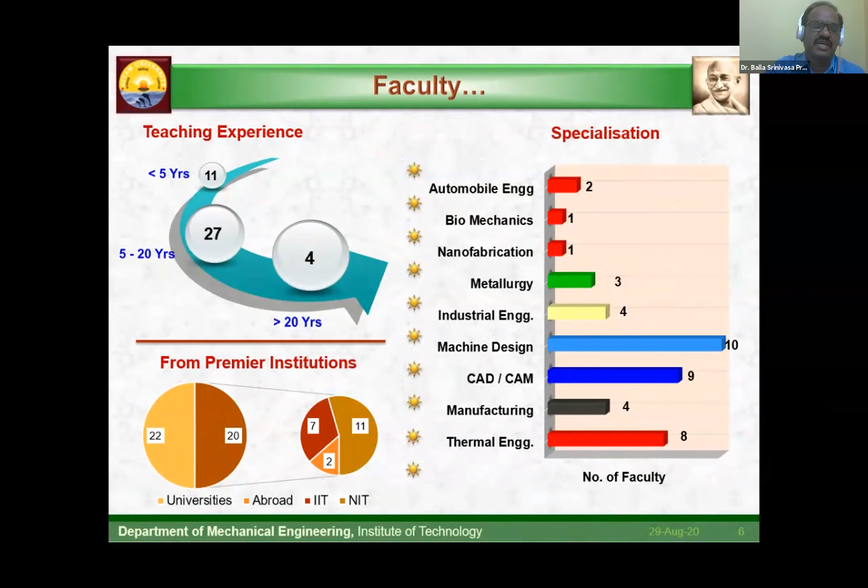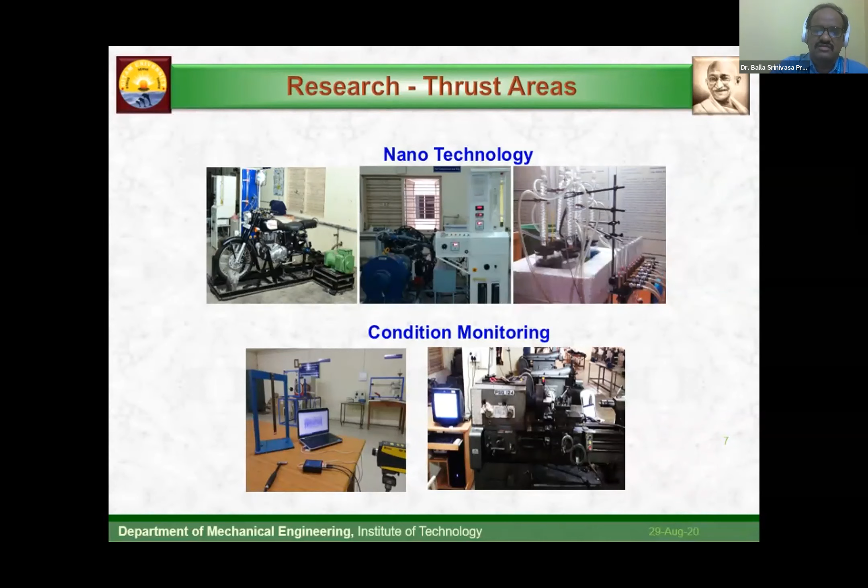Some faculty members are also involved in publishing books and book chapters.

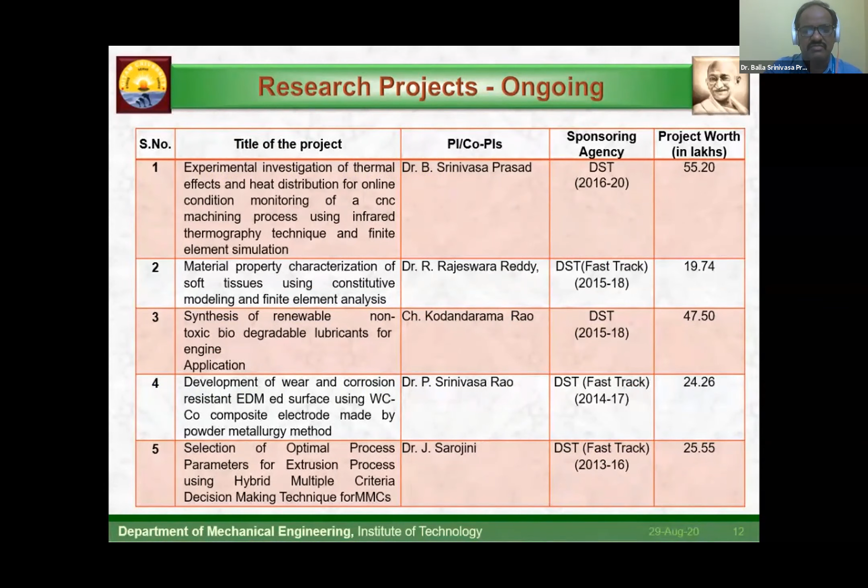This is the total worth of projects sanctioned to the faculty of Mechanical Engineering from various organizations of India. These are projects sanctioned by the Government of India to various faculty of the department, and I have included completed projects as well.

Students admitted to various programs in the Department of Mechanical Engineering have enough scope to explore research interests. These machines and equipment are not part of the curriculum, but are part of research projects. Whoever is admitted into this stream, whether PhD, MTech, or BTech, is allowed to work on this equipment, and the principal investigators actively involve students in these projects.

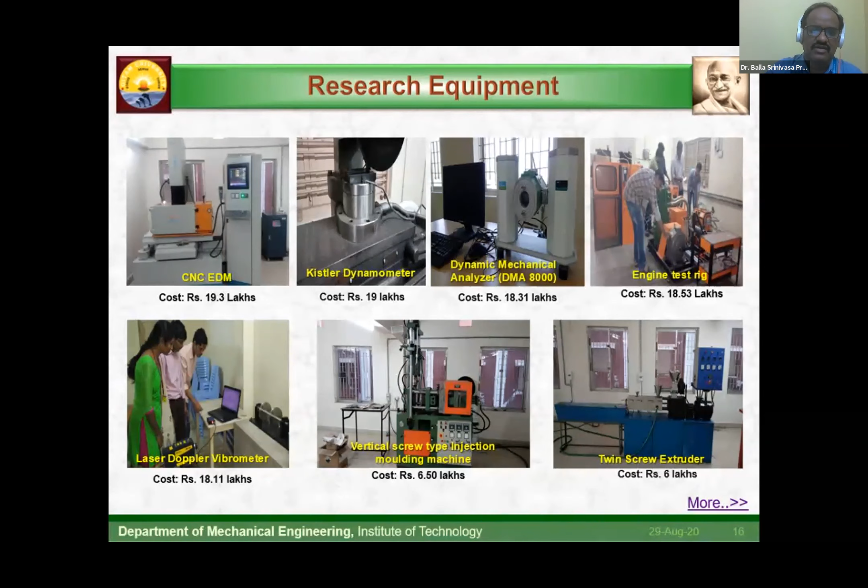This is one of the equipment procured by GITAM University with representation from our mechanical department, an Instron fatigue testing machine, costing nearly almost 1 crore.

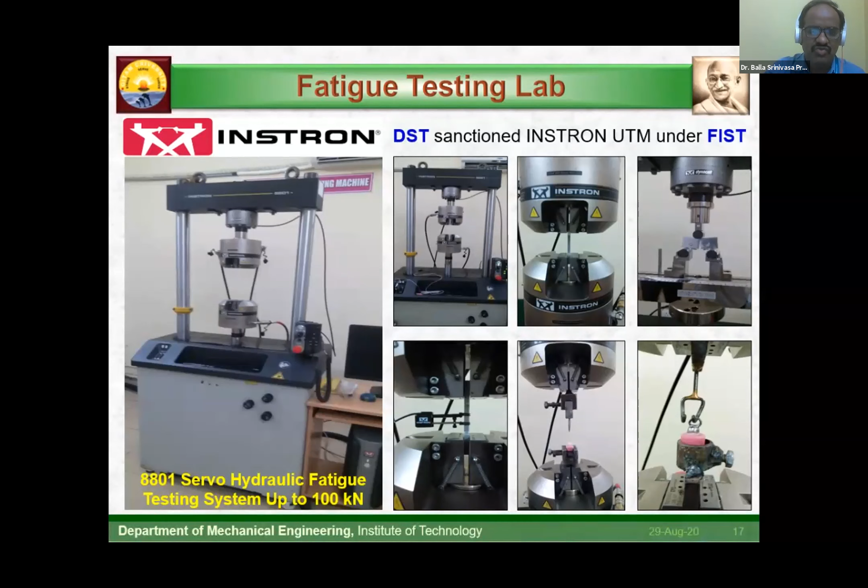This is about our department's involvement in consultancy, and this is about patents that some of our faculty members have already submitted. They are in an active stage of being awarded.

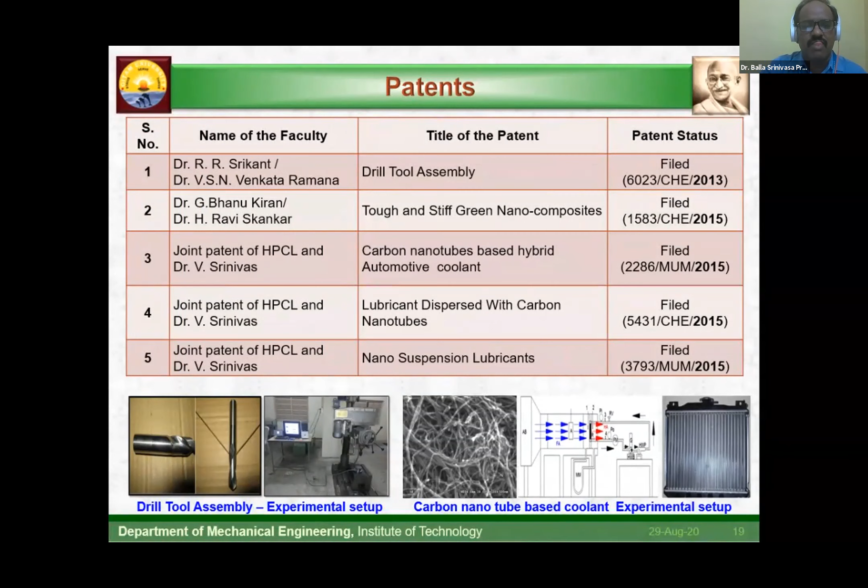These are the brief outlines about my department's credentials.

We actively conduct workshops and training programs, inviting experts from other countries, like you, sir. This academic year we started with a faculty member from University of Malaysia. Very happy to have you, you make us very happy, sir. Thank you. This is about the endowment lectures.

Our department has already organized endowment lectures at various stages, featuring popular personalities like Professor Samir Iqbal from University of Texas, a professor from New Zealand and USA, and Professor S.S. Rao, a well-known figure in industrial engineering from University of Miami.

This is about the collaborations our university has, including Hindustan Petroleum Corporation Limited Bangalore, Visakhapatnam Steel Plant (Rashtriya Ispat Nigam Limited), and CITD, one of the popular institutes in India. We have many such collaborations.

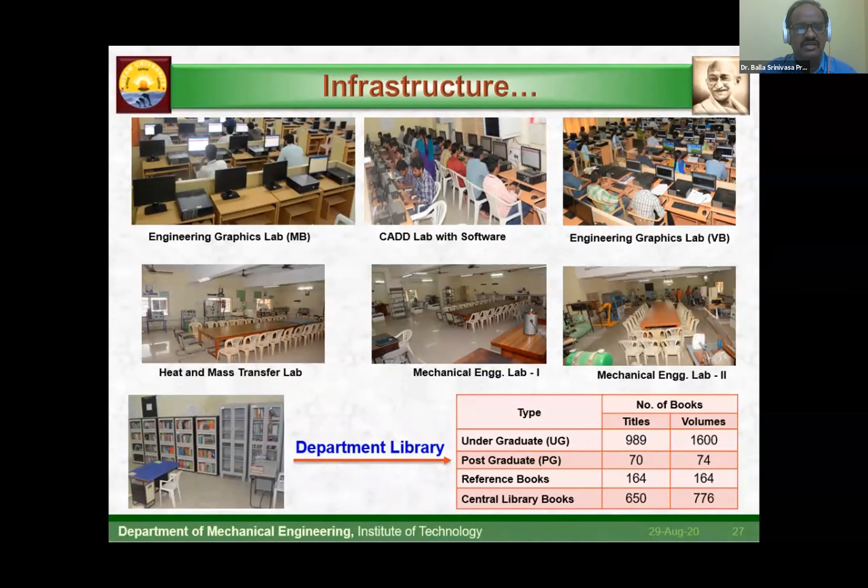This is the infrastructure facilities available in the department, and this is about students' progression. Academic monitoring, ICT-enabled learning, and we focus a lot on slow learners, with everything organized accordingly.

This is about the co-curricular activities of the Department of Mechanical Engineering, under the HOD Professor M.R.S. Satyanarayana.

This is extracurricular activities. Everyone is aware that India was affected by Hudhud, particularly in this region. We were affected by the Hudhud cyclone, and our faculty and students were involved in assisting the people.

These are the prominent alumni from the Department of Mechanical Engineering.

All these activities come under this. The Department of Mechanical Engineering has developed a forum that promotes research activities. So far we used to concentrate inside the institute and inside India, but with your presence it became global, sir, so we named it the Global Virtual Seminar Series.

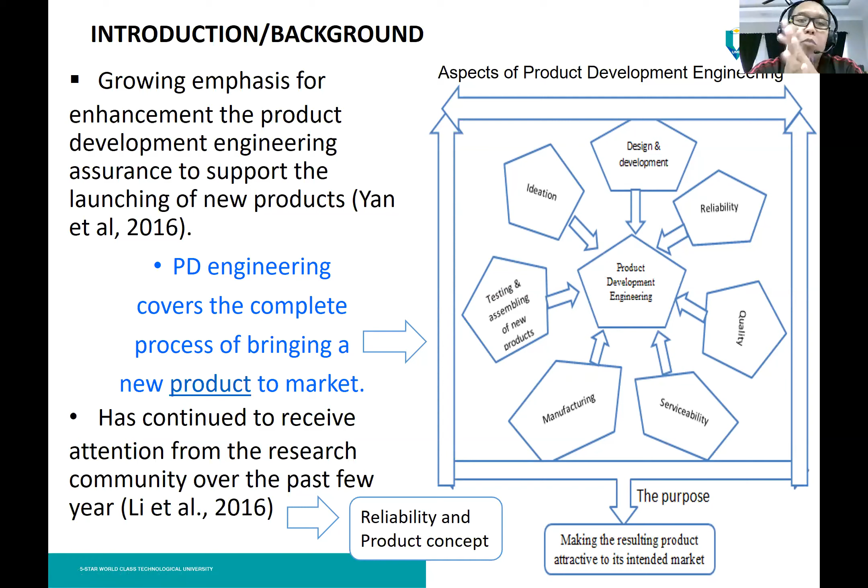As I said just now, most researchers previously separate between reliability and design concept. So as I mentioned here, I divided it into two parts. The first part is reliability, and the second one is concept assessment. If you look at most researchers, they try to separate these two things because when you combine them, your process will be too complex.

It will take too much time to integrate both techniques, and they require certain approaches or certain techniques that can actually integrate these two areas.

So some researchers focus more on understanding the reliability concern in complex products. For example, in 2015, one researcher focused more on the failure causes in the reliability area. Zubair and Bajri also focused more on predictability in the reliability area. Same goes for Liu and Anderson in 2015, who focused more on better management opportunities. Also, in 2014, Berlin identified the reliability problem areas.

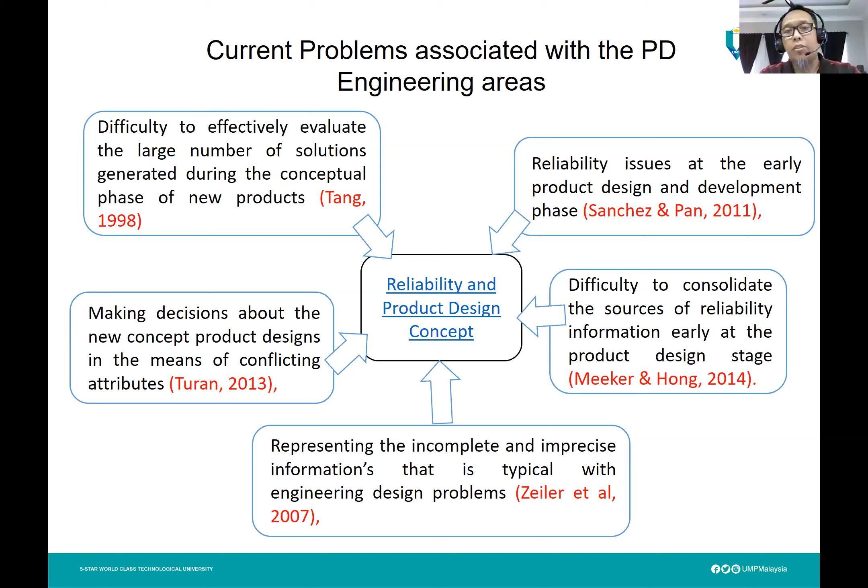With this constraint, it actually represents incomplete and imprecise information, which gives a tough situation to designers trying to make a final decision. Even though some effort has been made by researchers in improving decision making model techniques, there's still a need for a method to adequately and effectively address product reliability and design concept.

So in this research, I'll try to combine both the design concept and the product reliability. Instead of conducting them separately, in this research I'm trying to combine these two into one framework, so that it can help designers reduce product development time and cost.

If we look at this, there's one researcher, Xiao, in 2016, who highlighted accounting for the decision maker's subjective judgments. Of course, if we deal with human perception, it's very difficult for us to quantify, and he focused on this.

Li, in 2008, expressed the information in several dimensions to reflect the assessment information in a more holistic manner. As I said, feedback from respondents is sometimes very vague, so designers need certain techniques to quantify it.

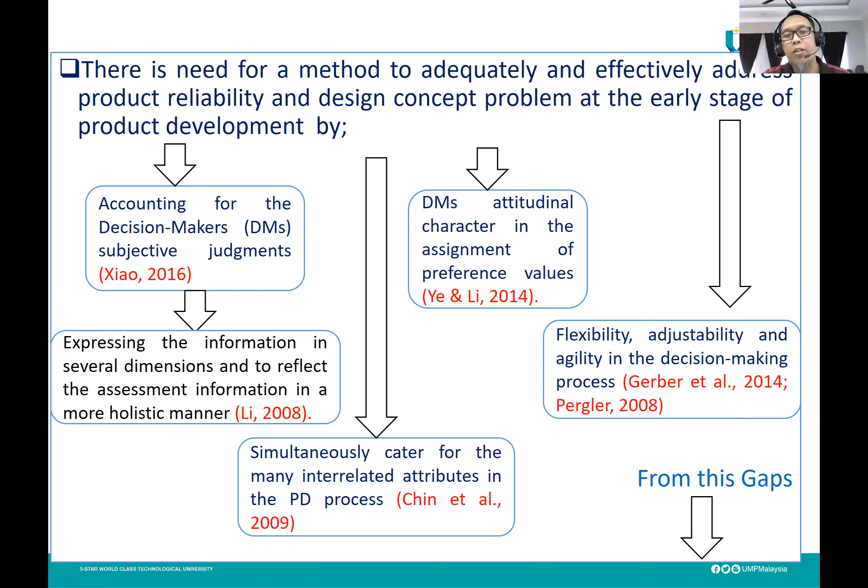From this gap, I'm trying first to define a reliability assessment method using elicited expert opinion for detecting the root cause of failure in existing products. I want to develop an assessment technique that can help designers get exact data to detect the root cause of failure in the existing process.

From objective one, I'll move to the objective where I want to develop a novel and flexible model. As I said, when developing a model, it should be flexible and adjustable enough so it can be used not only by designers in a certain area, but also in other areas, so this flexible and adjustable methodology can effectively support the designer in making high-level decisions.

I also want to apply the newly defined and developed reliability concept in product design assessment. As I said, the basic concept of my framework is to combine both reliability and the design concept.

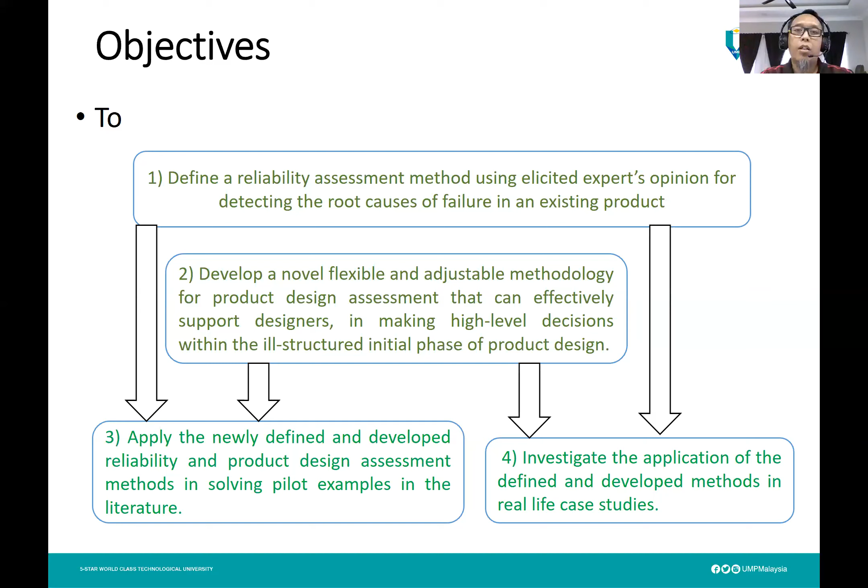So, the new reliability assessment model - basically for this one, I based it on the traditional fuzzy TOPSIS model.

The most common decision-making tactic is the TOPSIS model. Based on this TOPSIS model, I extended it by integrating it with the intuitionistic fuzzy environment.

Since it doesn't consider the attitudinal character of the designer, I introduce the attitudinal parameter. Of course, it's not a simple thing to combine the quantitative and qualitative data or qualitative method, so I need to integrate using the technique of exponential related function.

When we deal with human perception or human judgment, we need an aggregation technique. In this case, I use the intuitionistic fuzzy weighted averaging operator, IFWA. For step number 5, I also use the exponential related function based separation measures. Finally, for the final calculation, I use the intuitionistic fuzzy entropy to calculate the criteria weight. These are the details of the algorithm of the model.

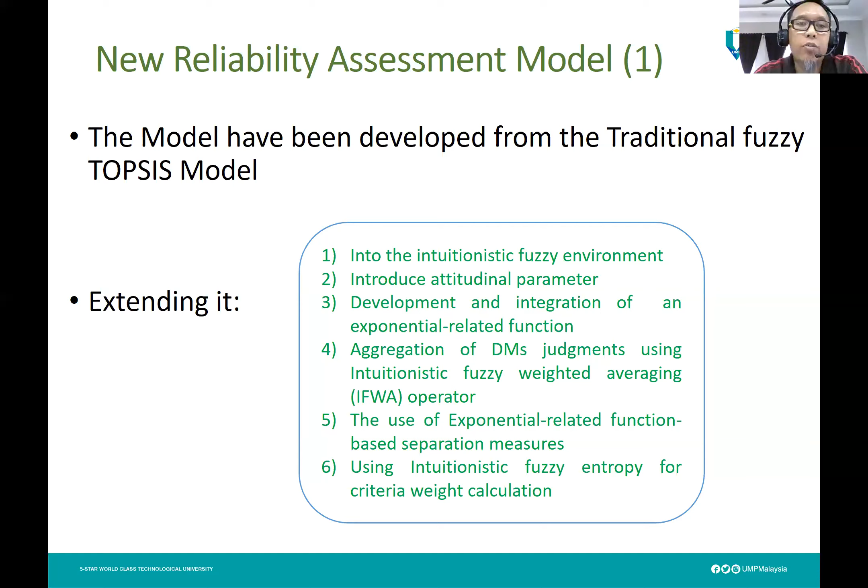Basically, I divide it into 6 steps. In step number 1, I try to aggregate the evaluation of the decision maker using the intuitionistic fuzzy weighted average, IFWA operator.

The first matrix that I show here is basically the generic metric. I just interpret the general variables, the general metrics, in the context of my research.

For step number 2, matrix number 2, in this case I used the exponential related function. This is where we include and try to quantify the human perception into numbers.

Step number 2 is actually the better performance rating from the previous metrics. The previous metric is general, and then I integrate it with the exponential function to become the customized metrics.

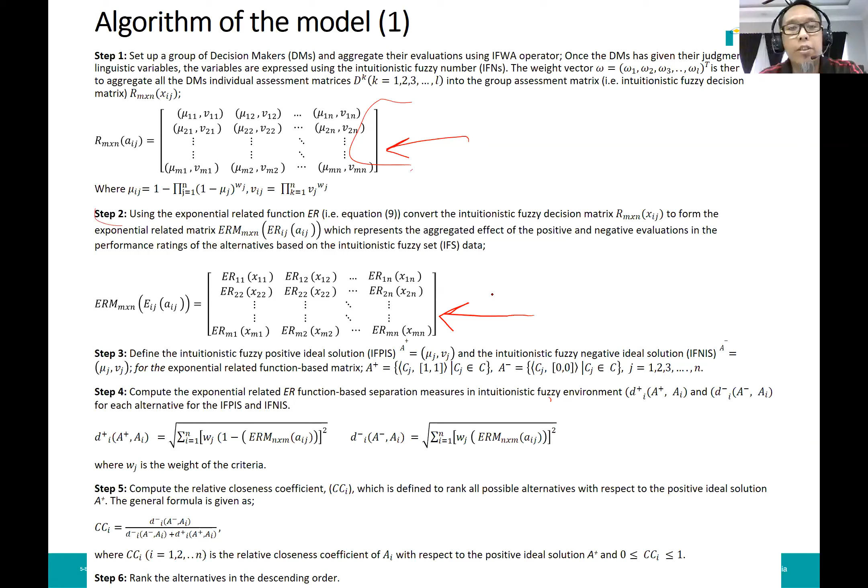We try to evaluate the algorithm by using data from a previous researcher. We based it on Yue in 2011, who attempted to implement the failure detection problem. We use the same data by Yue, who focused on severity, occurrence, and detection.

Using the conventional fuzzy TOPSIS, he finally got the ranking here for 3 attributes: A1, A2, and A3. His research shows that A2 is the highest priority, the second ranking is A1, and the third ranking is A3.

By using our proposed approach, we try to get the same number, and then we compare with Yue's results. It shows that A2 also gets the highest ranking. So at this stage, our proposed approach gives the same result as what had been done by Yue in 2011.

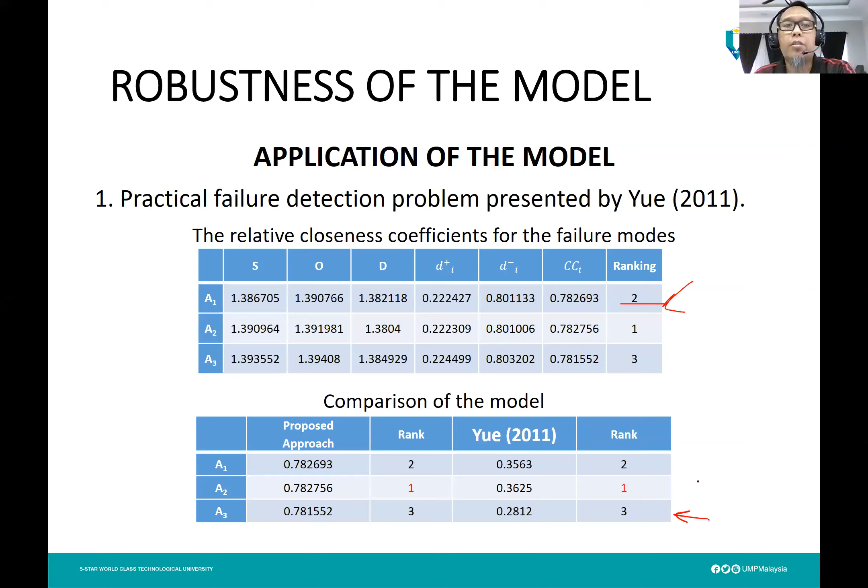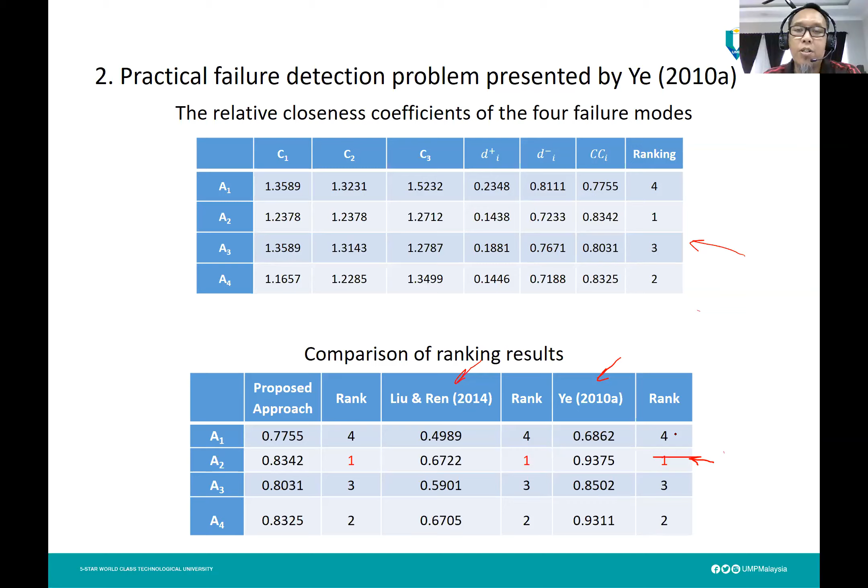Now, this is another challenge. Just now, the metrics that I showed you were not considering the attitudinal parameters or attitudinal character of the designers. Based on attitudinal theories, there are 3 main elements of attitude.

Number 1 is the risk-taking attitude, number 2 is risk-averse attitude, and number 3 is neutral. Here, I represent each character by lambda.

Risk-taking is lambda equal to 0.1. Risk-averse is negative 0.1, and neutral is lambda equal to 0.

We used the same case study as just now, which has 4 attributes. It looks like for risk-taking, it gives the same ranking as the previous result. But if we use risk-averse, it gives a different ranking, a different rank. For neutral, there's no need to do the computation, we just use the average number, because all criteria give the same values.

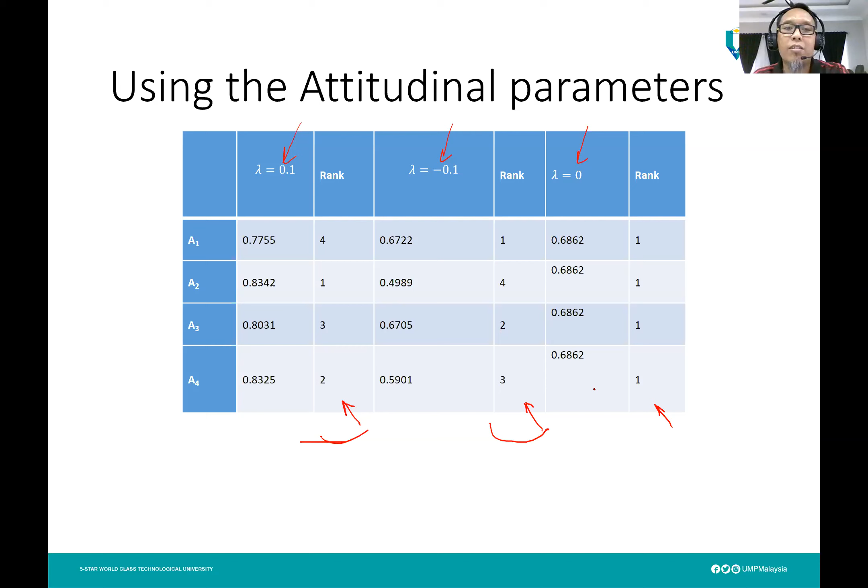So from this result, we know that the attitude of the designers will give a different result to the final decision. So this is our challenge. We don't know in the process of when the designer does a design, or makes a decision, we cannot actually detect or identify whether the attitude of the designer is risk-seeking or risk-averse. So to help improve the situation, that's why we came up with a new approach. Later I will explain.

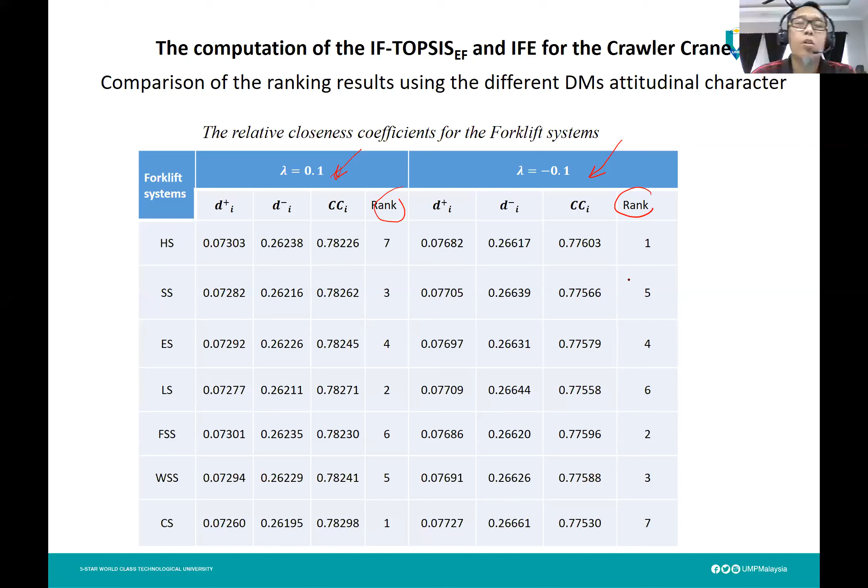But before that, I want to show you, if we consider this: we did a case study on the crawler crane design. We have 2 conditions, one is risk-seeking and the second one is risk-averse. We can see the rank here, using fuzzy TOPSIS, that both characters give a different value and different ranking. So it proves that different character will give different results or different decisions.

So that's why, instead of just basing on the first step, the first algorithm just now, we come up with the second step, which is the new assessment model. It is inspired from Tan in 2011 and Ye 2013, where we use the triangular intuitionistic fuzzy numbers to further improve the technique on how to deal with the designer's character or attitude.

So these are the steps of the new model. We use the intuitionistic fuzzy number, and second, we allow for more attitudinal information. We don't just base it on single data, we keep getting the attitudinal information from the designers. Then we introduce the flexibility and adjustability function, because different designers have different environments, different nature of work, so we have to include this flexibility and adjustability function. And since I'm trying to integrate two different models, at the end I have to reduce the computational step, otherwise the method will have a very complex process.

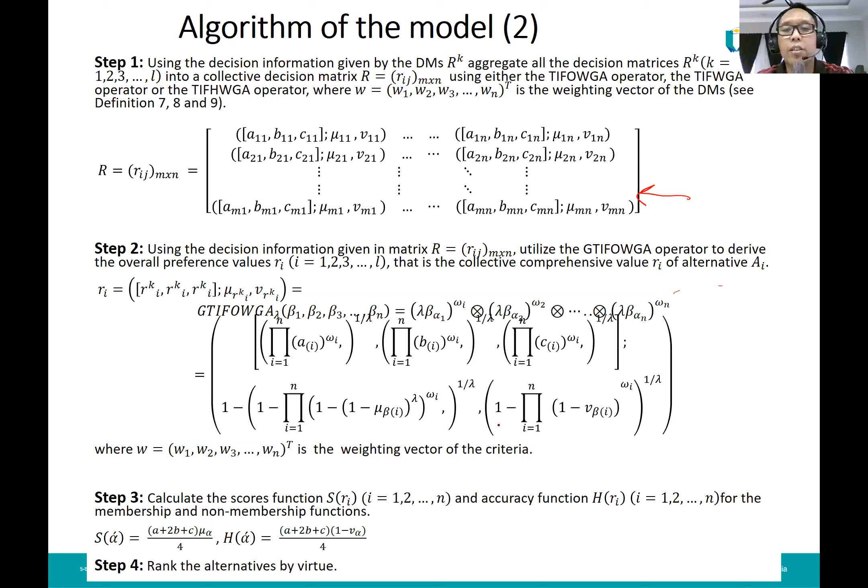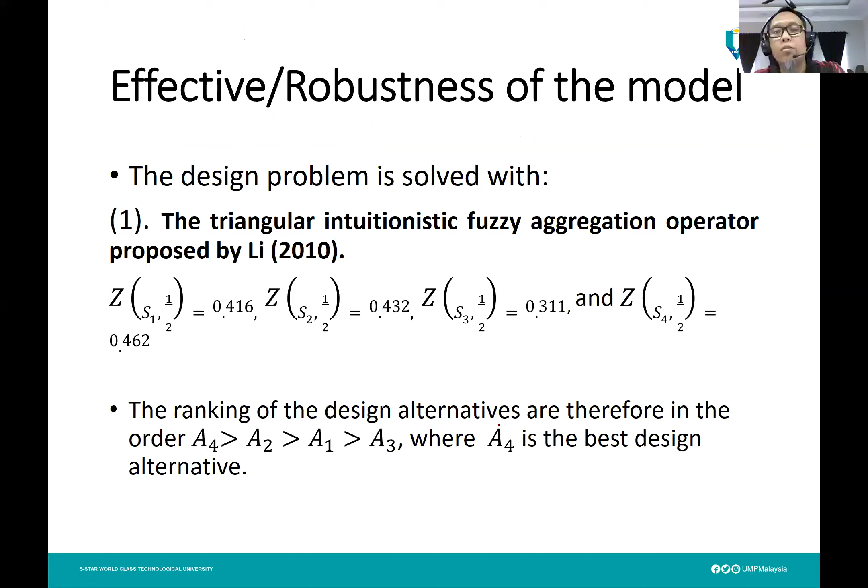So these are another design problem with 4 attributes, and of course I have different criteria for each design. Using the method that I showed you before to compute this data, and finally when we rank the alternatives using the technique I showed you just now, I'm using the triangular intuitionistic fuzzy aggregation operator and then VIKOR, instead of just relying on TOPSIS, I'm trying to extend it using the VIKOR method. The final ranking shows that A4 is the best alternative.

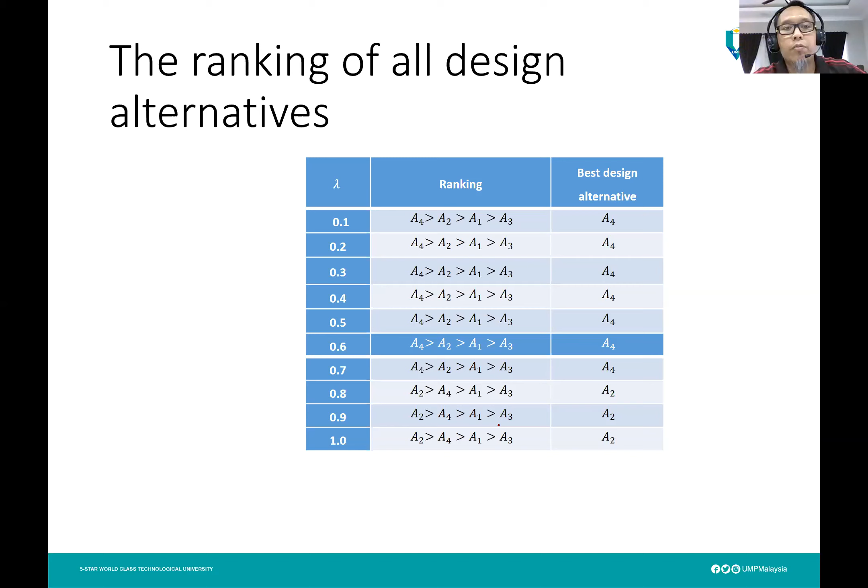And also, if you look at this, the lambda is actually the value of the attitude just now, the attitudinal parameter that we already quantified, using VIKOR or the matrix just now, we already embedded into the matrix. So from these two methods, the two models that I showed you, I already take into account the attitudinal character of the decision maker by using the exponential related function and the flexibility and adjustability parameter.

And for the reliability model that I showed just now, it enables the detection and prediction of the root cause of failure, which the study found useful at the early design stage. So by using the proposed method, the designer can actually assess both the reliability and the concept design stage by considering the attitudinal character of the designers.

This model actually simultaneously caters for the many interrelated attributes in the product development process. So even though I'm just focused on reliability and concept design, using the same technique, it can also consider or cater to other factors in the product development engineering.

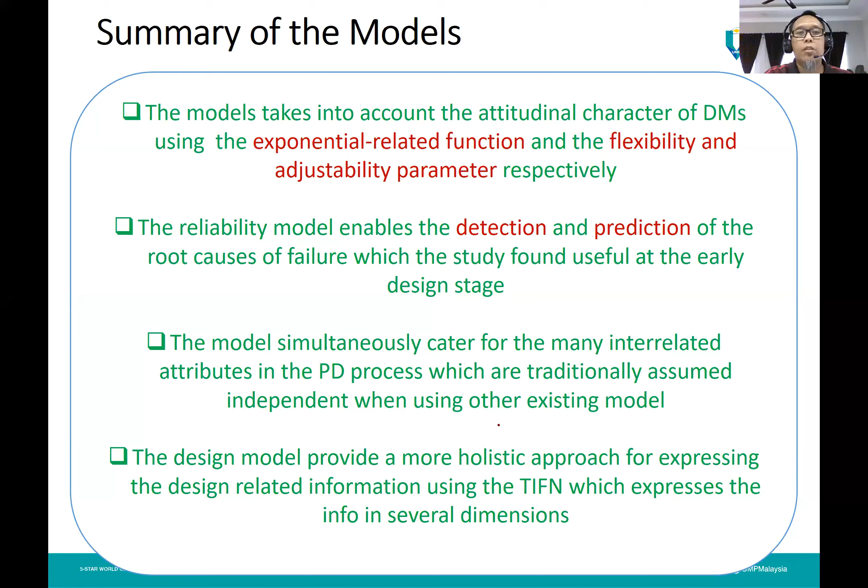The design model provides a more holistic approach for expressing the design-related information using the triangular intuitionistic fuzzy numbers, which express the information in several dimensions. And finally, I call these two-step techniques AI-based techniques.

This technique actually provides an innovative approach which could support the launching of new products, since the aim of this approach is basically to help the designer reduce the product development time and cost. So this study also provided two new AI-based techniques, as I said.

Number one is the reliability. The second one is the concept design by including the attitudinal parameter.

And then in the future, as I said, we intend to make the model user-friendly after some improvement. So my aim is to develop a decision support system, so we can make it into simple software, so that it can help the designer simplify the process. You just key in the value and then you get the final results.

So these are some references that I used for this research.

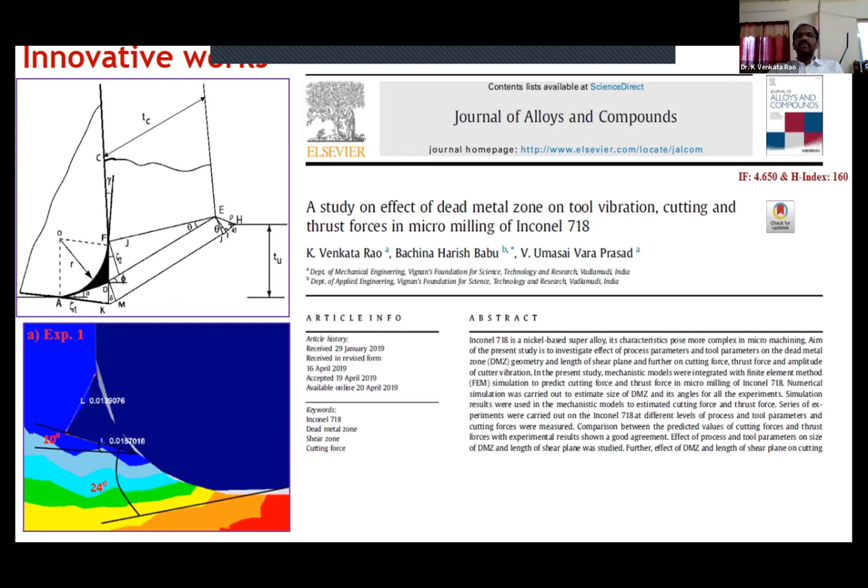So another innovative work—this is also a very limited study done on the effect of wire vibration on kerf width and surface roughness. For the surface roughness, we have mathematical models to find out the surface roughness using the vibration in X and Y direction.

But here, kerf width is difficult to model. So in this study, myself and my colleagues at Vignan University developed mathematical relations using the wire vibration in X and Y direction.

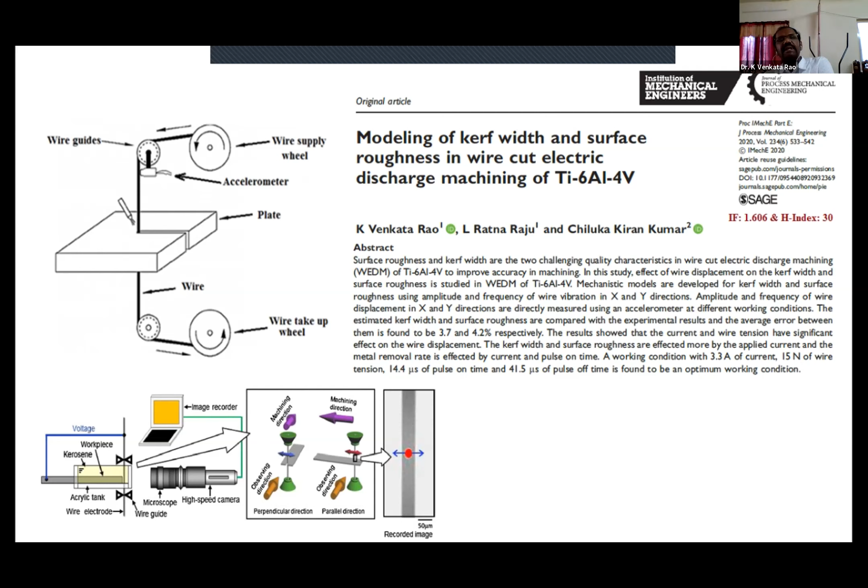Anybody can do this one. This is another innovative work considering helical milling, where we measure the vibration of the tool in X, Y, and Z direction using the amplitude and frequency of tool vibration in 3 directions. We developed mathematical models for the circularity ourselves. This one was accepted and published in an SCI journal.

Using gray modeling prediction techniques, GM11, GM12, and so on, we have mathematical gray models. It doesn't take more than 1 week. You can easily use the gray prediction model, GM11 or GM12, using time series, to predict the cylindricity also.

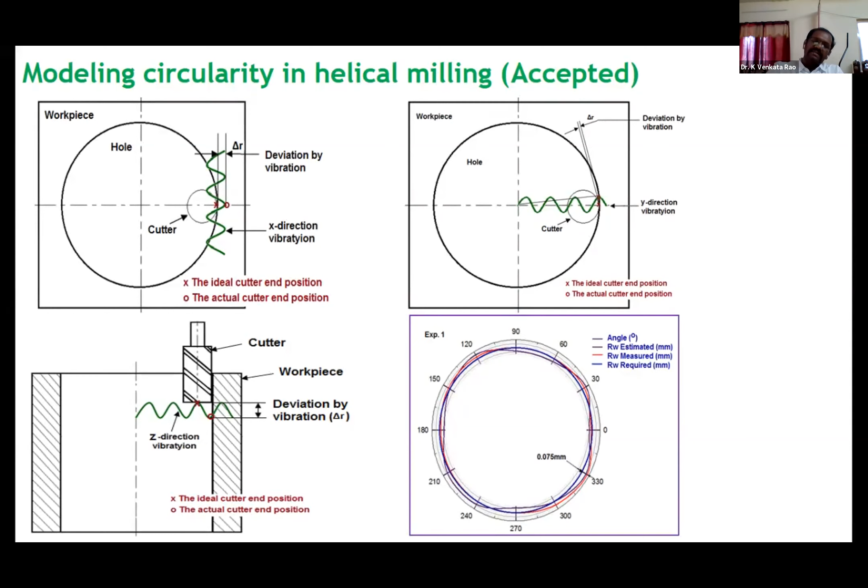Here we predicted only the circularity, but you can predict the cylindricity also. Along the length of the workpiece, you can find out the errors in cylindricity during the machining process. You can predict this. This is one of the predictive works, and here is another one.

We can scientifically find out the weights for the responses. We did this work for 3 papers published using GTMA, all in SCI journals, including the Journal of Alloys and Compounds, a high impact factor journal.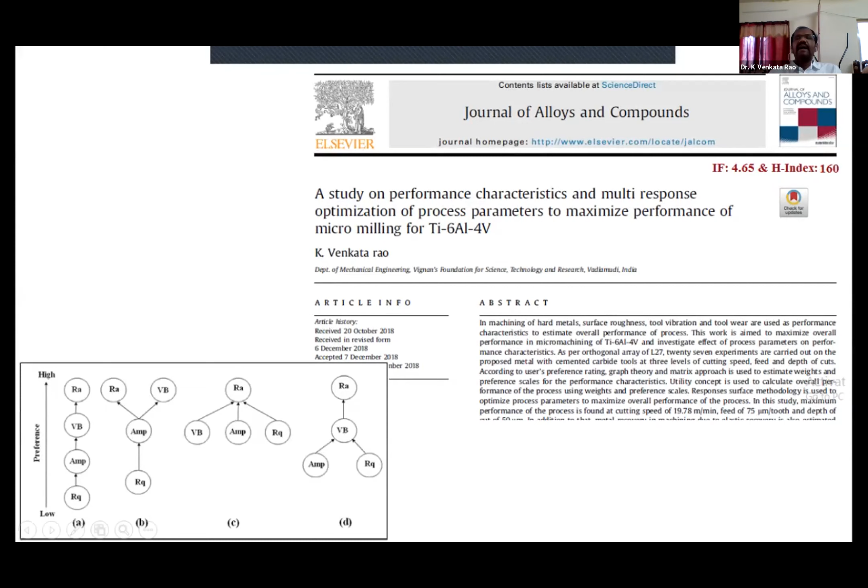This is another one where we use AdvantEdge software for ball end milling. Ball end milling is generally used in the fabrication of dies, where at corners you have sharp corners that need to be smooth. In a regular end mill cutter, if you see the bottom, it is flat, so you cannot get round corners in the die cavity. To get round corners, you must go for ball end milling.

Compared with flat end mill cutters, ball end mill cutters have a larger cutting zone, which is associated with more cutting forces and higher power consumption. So here we used the same TLBO technique to reduce power consumption. This was published in the journal Measurement.

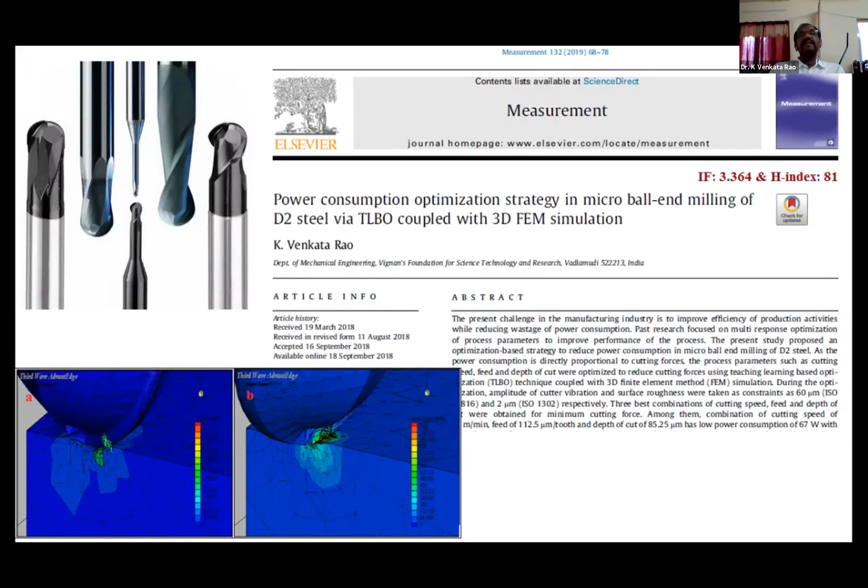Okay, this is another innovative work, friction stir welding done by me, where I used DEFORM 2D-3D integrated.

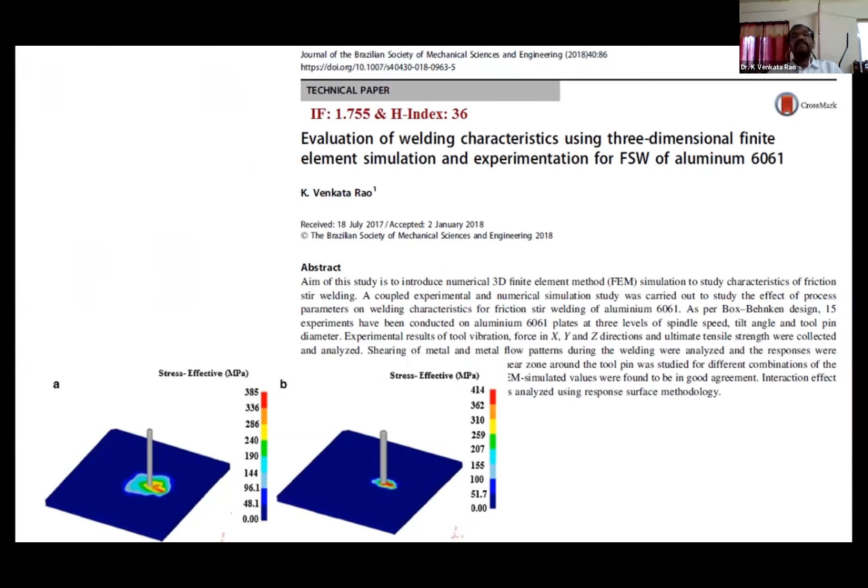So we have deform 2D 3D. We have a deform integrate 2D 3D option in the deform software. Using that, we can simulate the welding process. This was also published in the Brazilian Society.

Now this is the last one, recently done, published on August 25th. This work was done by me. We have another work of the same quality, yet to be published, currently in the review process. This one is also done by me.

Its impact factor is 7.246, the highest impact factor in Production. Now the work which I am presenting is the one I published in Cleaner Production.

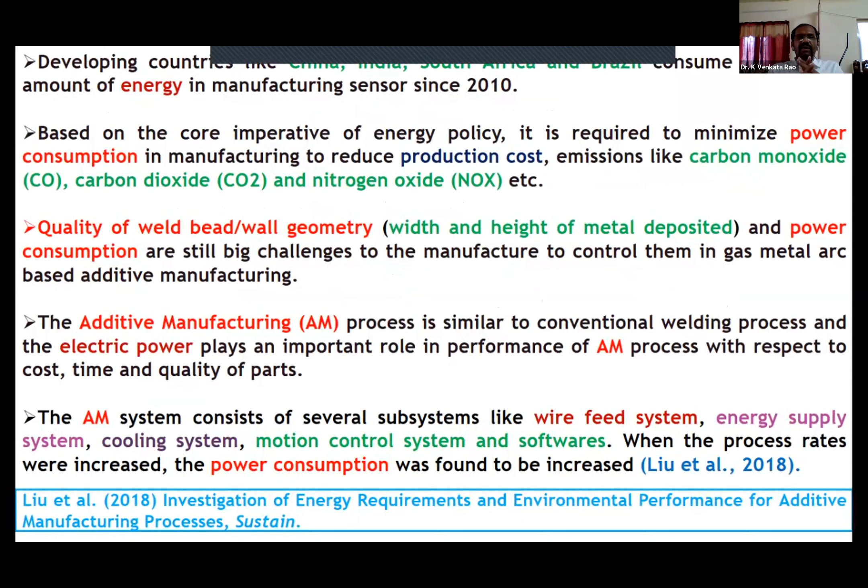Now you see, in developing countries like China... Now I'm entering the actual work presentation. Please listen carefully.

In developing countries like China, India, South Africa, Brazil, Sri Lanka, the power consumption has doubled since 2010, especially in the manufacturing sector. In most developing countries, the manufacturing sector occupies a 25% share of the country's GDP.

So when the manufacturing sector is large, the power consumption is also more. When power consumption is more, there is also environmental impact. When demand for power is more, to meet that demand we produce excess power, which proportionally impacts the environment. So here we want to reduce the amount of power consumption.

In metal manufacturing industries, there are many power-consuming subsystems. For example, if it's a machining industry, most machines are metal cutting machines. In addition, we have material handling systems and coolant systems. Like that, we have various subsystems.

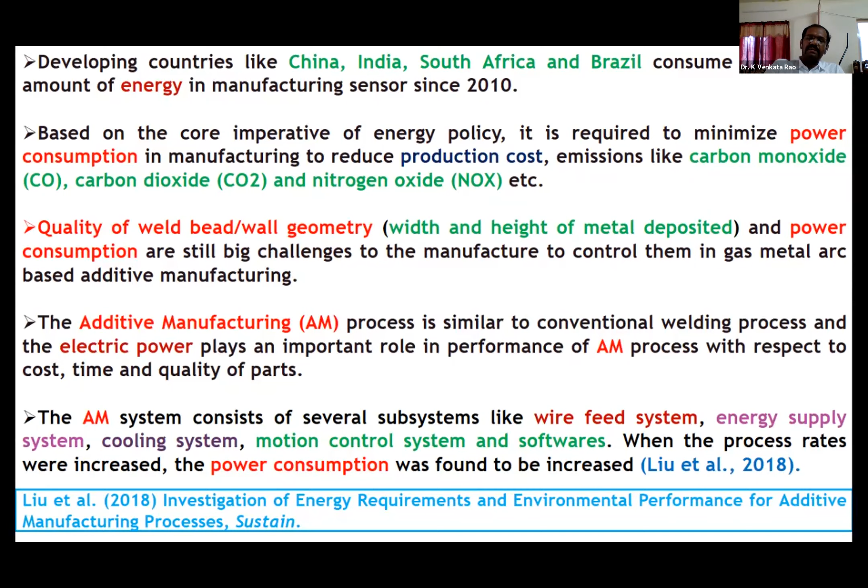Additive manufacturing is similar to conventional welding, where an arc is generated between the wire electrode and the workpiece, and the spark or arc consumes power to melt the wire electrode. Everybody knows arc welding, that's why it wasn't explained in detail here.

Here are some components showing the quality made by additive manufacturing. In the first figure, a circular component, and other complex shapes can also be made by additive manufacturing. Most of you know this. First we build the component through solid modeling, then it's made into slices, each slice thickness less than 1 mm.

In additive manufacturing, most of you know this - layer by layer, just like slices, the work is done in conventional additive manufacturing or 3D printing. But in this additive manufacturing, it's not exactly like that, though the concept is the same.

Here also layer by layer, but each layer is not less than 1 mm, more than 1 mm. So the thickness of each slice is more than 5 mm. That's how we have it in metal additive manufacturing.

Our aim here is to control the wall geometry quality, that is thickness and height, and what is the optimum thickness and height. As per requirement, the thickness of the wall should be 5 or 6 mm, not more than that. Like that, we have constraints, and according to these constraints, the component is to be made. The constraints in detail we will see in the next slide.

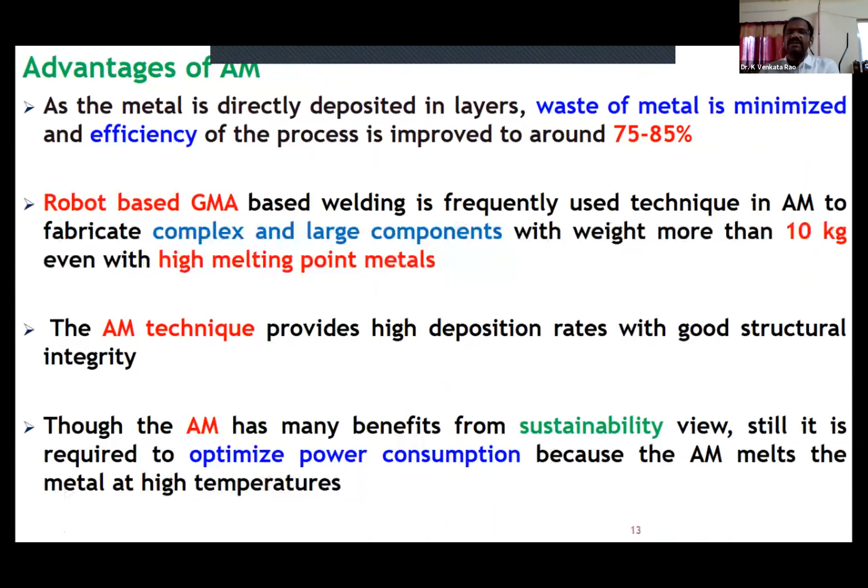Nowadays we are using robots in additive manufacturing. The robot arm is given the torch, and it is programmed to move in X, Y, and Z directions. It is able to fabricate complex and large components. This kind of part can be made by the robot - weight more than 10 kg, with high melting point metals like titanium and inconel, can also be fabricated using this robot-based gas metal arc welding technique in additive manufacturing.

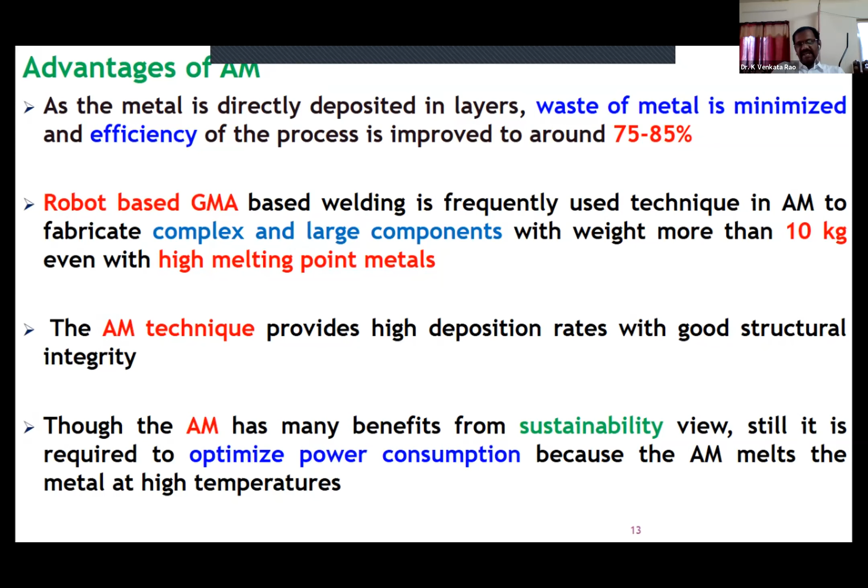Though additive manufacturing has many benefits, it is still required to optimize power consumption, because it melts the metal at high temperature. So it consumes more power than in cutting processes. That's why it's required to optimize the power consumption.

These are some previous research works where difficulties were found. In robot-based arc welding additive manufacturing, at the start you typically see swelling, and at the end you see reduction - this is a common problem for everybody. This can be sorted out by controlling the process parameters at the start and end.

He et al. proposed some control working conditions at the starting and ending through a certain technique. We were also able to achieve this - in the second figure obtained in our own work, there is no much variation at the starting and ending. Using the same technique, the swelling at start and reduction at the end can sometimes be completely controlled.

Another thing to look into is arc force. This work was done by Lee et al., published in Robotics and Computer Integrated Manufacturing, 2019. He studied the molten pool, that is weld pool stability, of thin wall parts in robot GMA (gas metal arc) based additive manufacturing, with various deposition positions, conducting experiments at 60 degrees, 90 degrees, and 120 degrees torch angle.

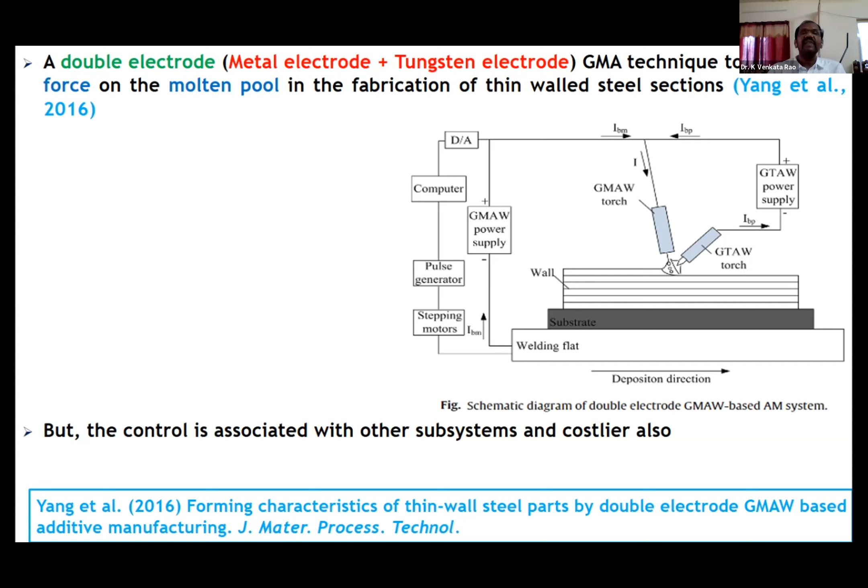This slide we already explained in advance. So in that presentation, we studied the effect of arc force on the thickness, width, and depth of the weld bead.

So what are the forces in that metal transfer? There are different theories for metal transfer. What is this metal transfer? Generally, in the second year in manufacturing technology, in gas metal arc welding, that is metal inert gas welding, we have five types of modes of metal transfer: short-circuited, globular, spray, pulsed, and rotary spray.

Among all these, by increasing the parameters, we can get a transition from globular to spray, to rotary spray. Like that, we get pulsating spray. We get different types of modes of metal transfer. So among the different types of theories we have, for this work,

I took the static force theory, which describes the detaching of molten metal, that is the drop, from the metal wire electrode. This work was done by Kim and Eager in 1993. We have the filler wire, that is the electrode, and electromagnetic force at the top, which tries to detach the molten metal from the wire, and gravitational force which pulls the drop. So when the drop is growing while melting, as the gravitational force increases with size, once it reaches a certain weight, automatically by gravitational force it will fall as a drop.

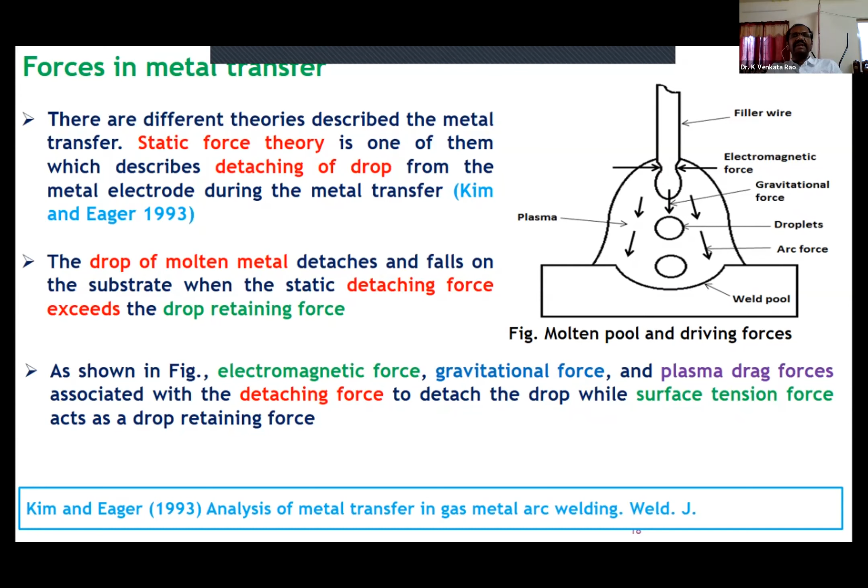These are the electromagnetic force, which depends on the current, and this one is the gravitational force. How to find out this gravitational force? The details are given here. This is also the plasma stream force. All these values are standard values taken based on previous researchers. Finally, the total arc force is the sum of electromagnetic force, gravitational force, and plasma force.

Sum of these three. So the effect of this total arc force on the wall geometry was studied in this present study. This is after performing the welding or additive manufacturing. See this, like this.

Across this specimen we cut, and this is placed under the microscope and measured the size. So this is the weld pool, width of weld pool. This one is the height of metal deposition. This one from here to here is the width. So that's the profile of this one.

Generally, the geometry of profile of metal deposition is on substrate, the plate where we welded. Different studies have defined this using parabola, arc, and cosine curves to study the effect of process parameters on the bead profile. As shown in the figure, bead profile seems to be symmetrical and is modeled with a parabolic function given in this equation, where x, y are the coordinates of any point on the parabola, H is the height, A is constant. Everybody in manufacturing technology knows this equation.

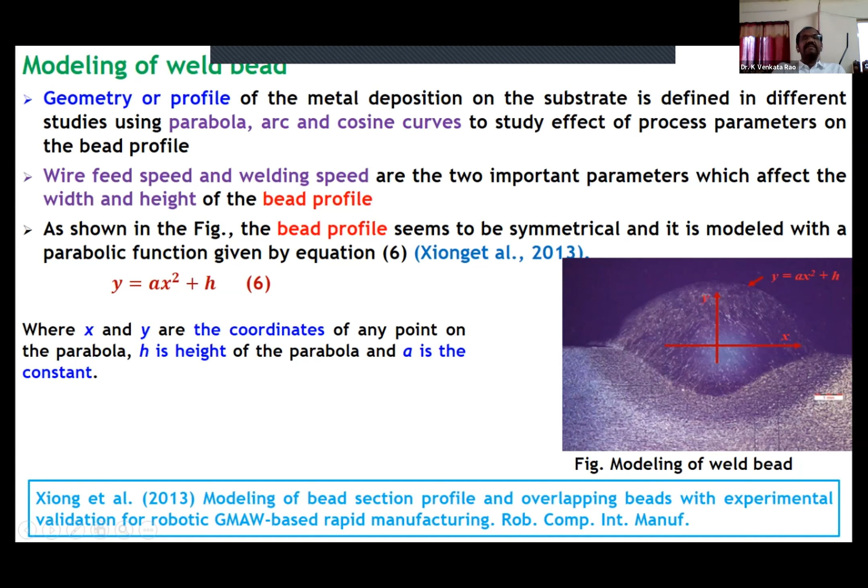Now in this process, we simulated the metal deposition on the substrate using finite element modeling, using Simufact welding. This is very simple, you can download it from the net, and we have a manual with step by step instructions, not only for arc welding but also gas welding, fillet welding, corner welding, different types of lap joint, butt joint, and even resistance welding.

In Simufact welding we have a detailed manual procedure. From that manual, you select one plate as substrate, one plate as bearing, which is the bottom plate, 4 clamps to clamp the substrate on the bearing at 4 places, and one robot. All these things you have to select from the list.

The substrate is clamped on the bearing at 4 corners with a distance of 20 mm each, and the size of the substrate is taken as 100 by 100, though you have the facility to change the size. For the clamps, you can adjust height, diameter, and shape - here we took round shape, but square, rectangular, hexagonal and other shapes are also available. As per convenience, you can select and adjust the position of these things. It's very simple, you can learn this within 1 day if you follow the manual accurately.

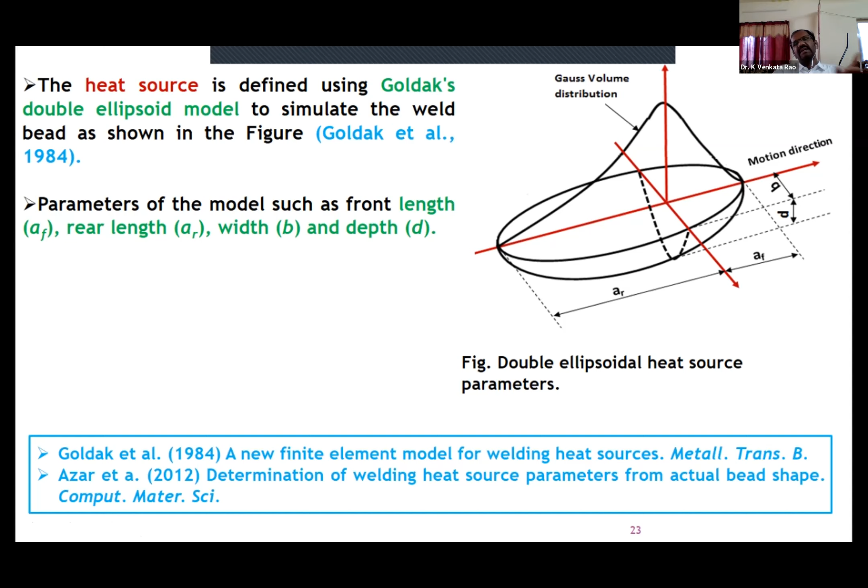That is based on the process parameters. You can define these values and put them in, and after that, if you run the simulation, see this one.

We say width, depth and height of weld bead are same as the experimental weld bead. Where there is error, it is less than 5%, not a considerable amount. So comparing experimental results with simulation results, they are almost the same - almost same as the experimental weld bead in the second figure.

So in this present study, what we did was study the effect of arc force, and not only arc force - in this experiment we conducted 16 experiments taking 4 input parameters.

Current is 1 input parameter: 150, 170, 190, 210. Torch angle we took only 2 levels, 60 and 90. Welding speed: 5, 6, 7, 8 - so 4 welding speeds. And this one, VS, is the wire feed speed.

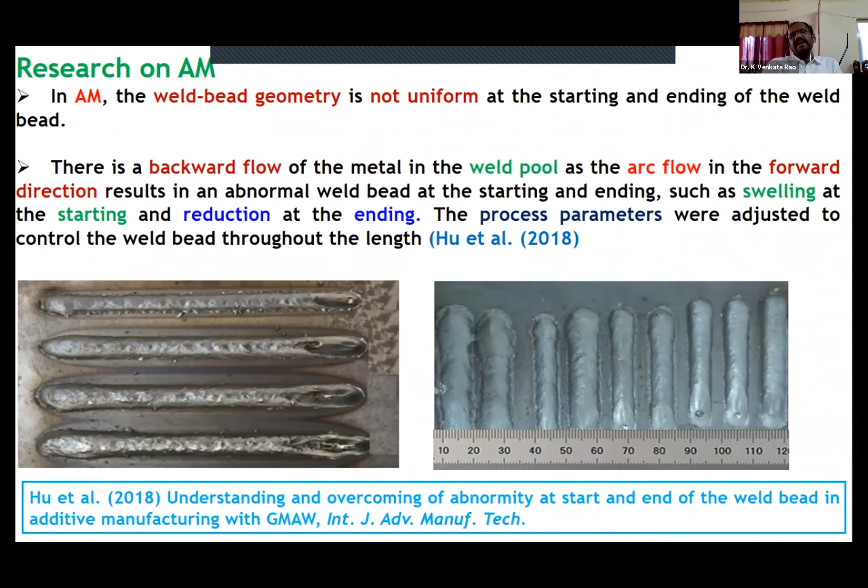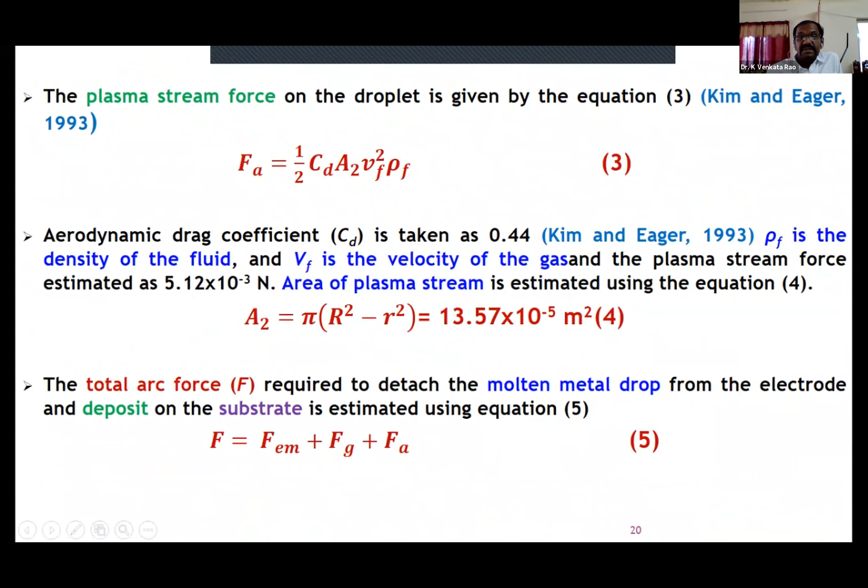This is PC, power consumption, which we measured while the experiment was going on for the 16 experiments. And this one is the total arc force, F, estimated using equation 5. Using equation 5, we estimated the arc force. So arc force is estimated using that one.

With the help of a mask, we are able to see the arc during the welding process, or this metal additive manufacturing. So some researchers used high-speed video cameras to capture the width of weld bead. The cost of that high-speed video camera equipped with a microscope is more than 15 lakhs, and due to limitations, that equipment is not available to us.

In this present study, what we did was predict the width of weld bead. This width of weld bead is predicted using SimuFact welding.

So before doing that, we have some research evidence. Some researchers did experiments and measured the width of weld pool using

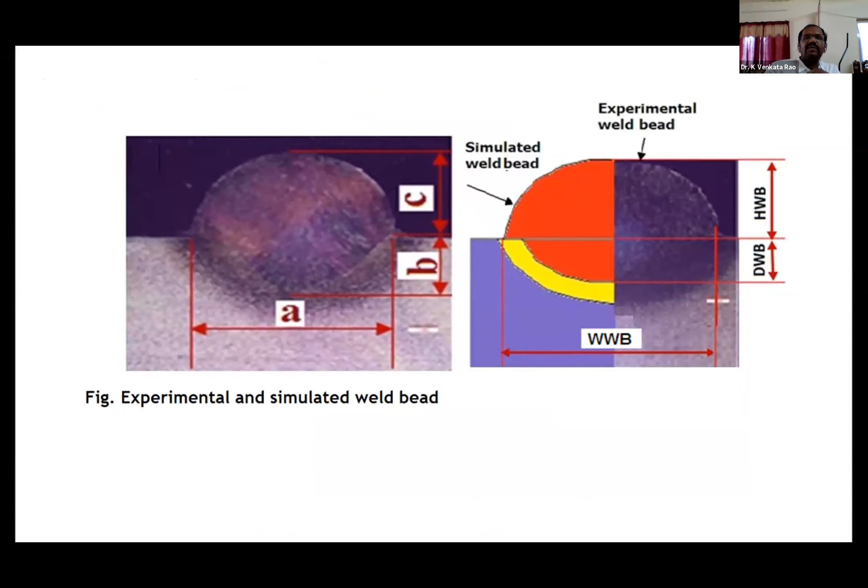So the robot costs around 38 lakhs. We purchased it using this one.

We carried out experiments as per design of experiment, that is orthogonal array of L16, and for each experiment we measured depth of weld bead, width of weld bead, height of weld bead, width of weld pool, power consumption, and arc force.

So here our aim is that the width of weld pool is to be reduced. See this one, the width of weld pool is to be reduced according to our requirements.

If you are able to reduce the width of the weld pool, the width of the weld bead is also reduced, and ultimately we want to increase the height of the weld bead. So that's our requirement. You have to maximize the height of the weld bead, minimize the width of the weld bead, and minimize the power consumption also. Our target is optimization of weld bead as well as optimization of power consumption.

What do you mean by optimization of power consumption? That we want to reduce it. What do you mean by optimization of weld bead? We want to increase the height of the weld bead and reduce the width of the weld bead. That is our aim. Depth of the weld bead plays a very less role. So that is our aim.

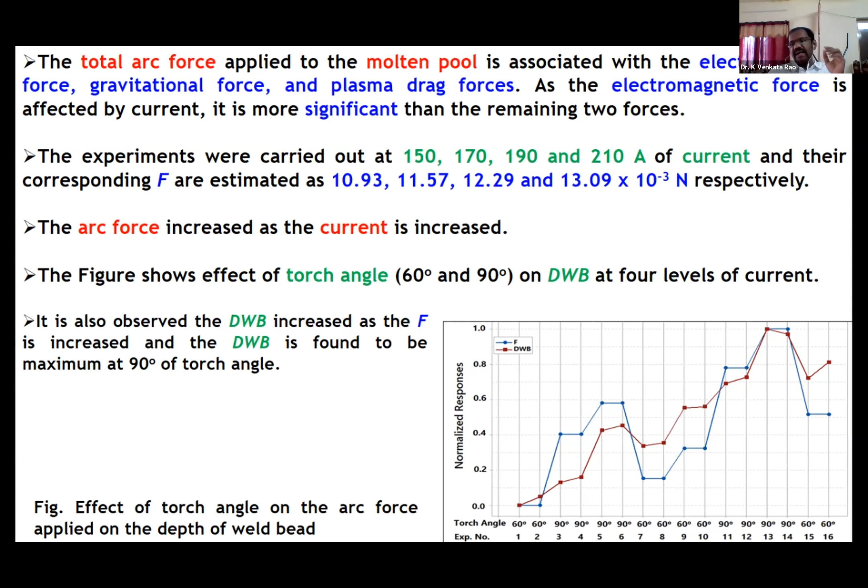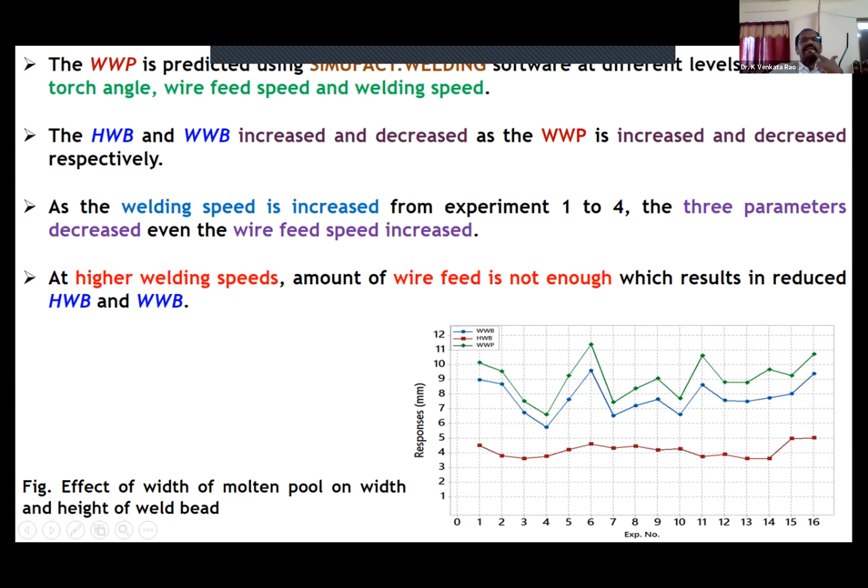So now, using the TLBO technique, we want to maximize the height of the weld bed and minimize the width of the weld pool. If you are able to minimize the width of the weld pool, we can minimize the depth of the weld bed, and we want to minimize the power consumption.

Seeing this optimization, let us see what is the TLBO technique. This is teaching learning based optimization technique, generally what we used to follow in a classroom.

For suppose in the classroom there are 30 students, and we newly entered the class to handle one subject. So after 1.5 units or 2 units, we conduct a mid exam. After the mid exam, we get the mid marks, and based on the mid marks we analyze the students' performance.

Suppose the mid exam is conducted for 30 marks. The students who got more than 20 marks we call bright students. Let us keep that as 25 marks - the students who got about 25, we call them better performers.

The students who got marks less than 15 marks failed - they are called poor students. Those who got 15 to 25 marks are the moderate, medium students.

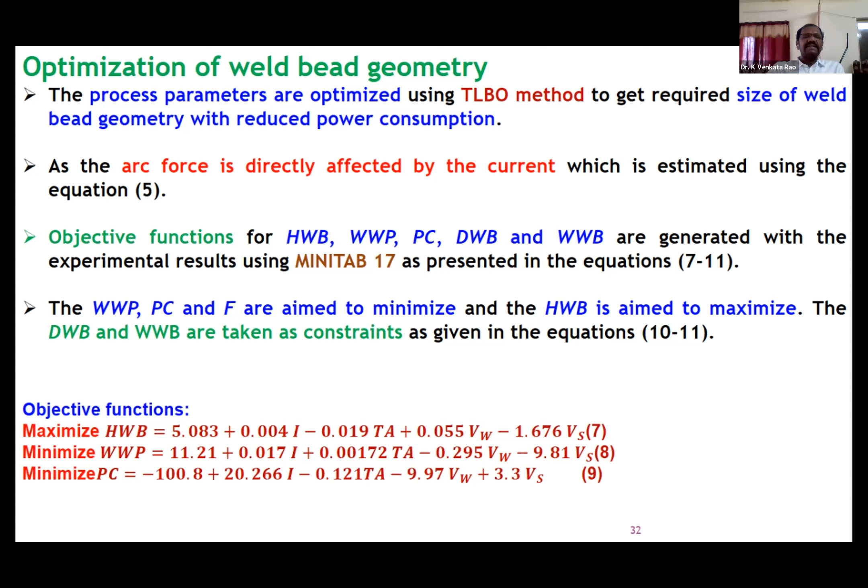Like that, here also we take the constraints. First of all, we have total 5 subjects - see this one, 1, 2, 3, 4, 5, 6. Here we have 6 subjects.

Here we have taken only - that arc force, the effect of the arc force on the development we already studied. So here we have taken only 5 subjects.

So we generated the linear equations for height of weld bed, width of weld pool, power consumption, depth of weld bed, and width of weld bed. These equations were generated from the experimental data.

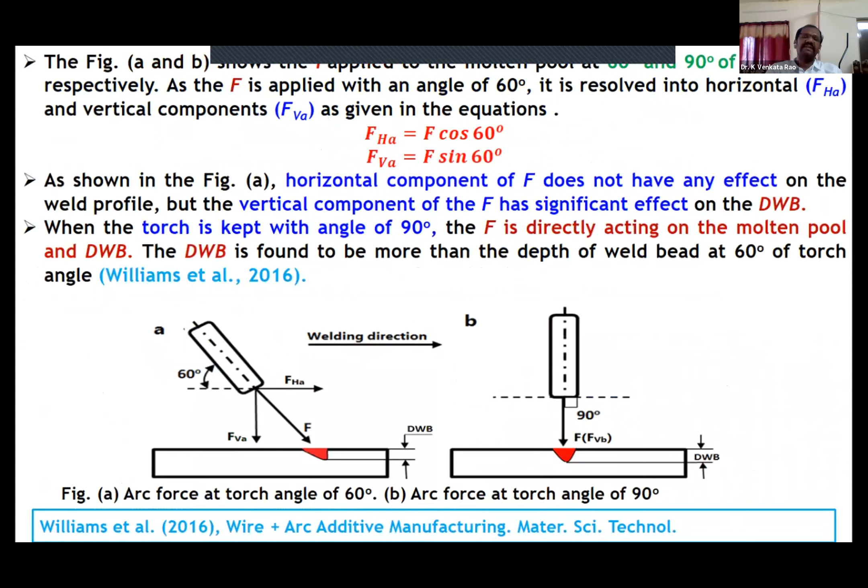Simply take the experimental data and put it in MINITAB where you have regression analysis. Using that regression analysis, we can generate these equations. The R square value should be above 0.9, only then you take the linear equations. All these equations were taken.

Our aim is to maximize the height of weld bed, minimize the width of weld pool, and minimize the power consumption. Depth of weld bed and width of weld bed we cannot minimize, but they are restricted.

Depth of weld bed should not be more than 1.5 - always depth of weld bed should be less than 1.5. Width of weld bed should always be less than 7 mm. So like that we have the constraints.

By keeping these constraints in view, we have to optimize the process parameters. All these 5 equations are generated using the experimental data.

So here, height of weld bed is maximized while minimizing the width of weld pool and power consumption. Keeping these two as constraints, depth of weld bed should be less than 1.5 mm, and width of weld bed should be less than 7 mm.

Based on the capacity of the robot and previous research works, these parameters are bound. So the current should be within these two limits only - should be 120, should not be more than 300, based on the previous experimental work I already explained.

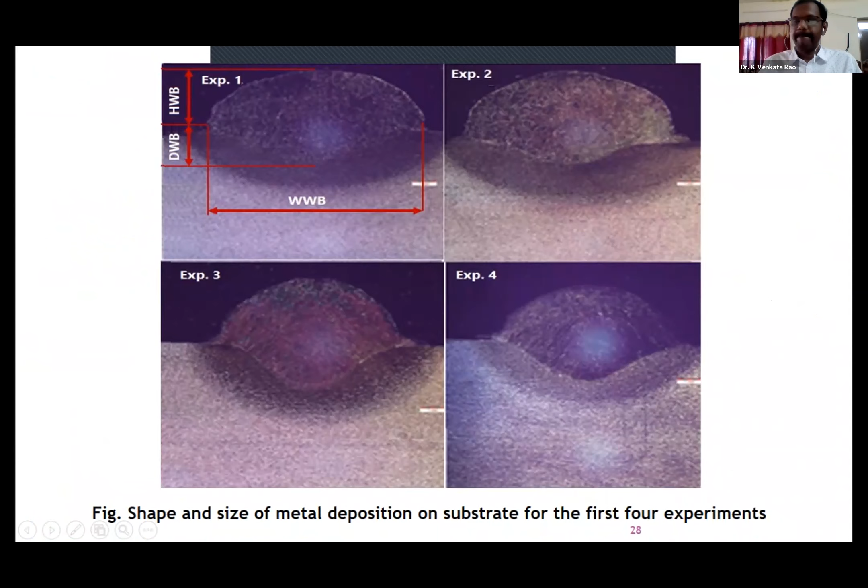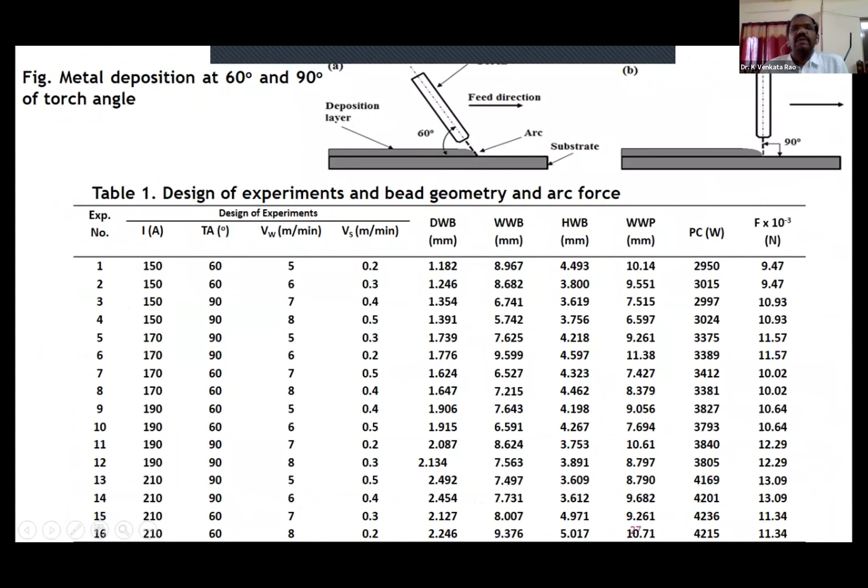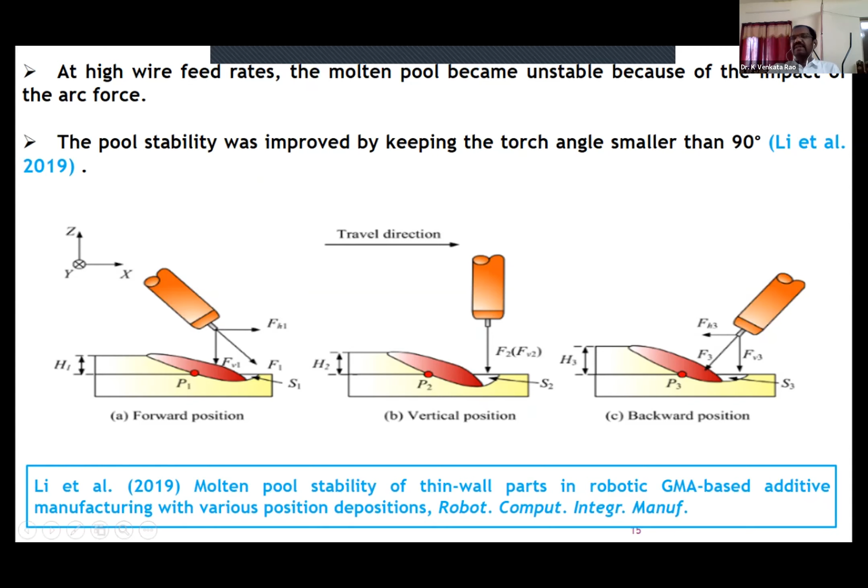These input parameters should not cross these two limits. So what is meant by this one? In details we will see later.

You see here how to find out the constraint first. Generally here we have taken two constraints, finding the constraints for the depth of weld bed and width of weld bed, we see here.

So the constraint of weld bed: depth of weld bed minus 1.5, for the width of weld bed minus 7, based on these constraints. Depth of weld bed should always be less than 1.5. Width of weld bed should always be less than 7 mm. So depth should be 1.5 mm less than that, width should be less than 7 mm.

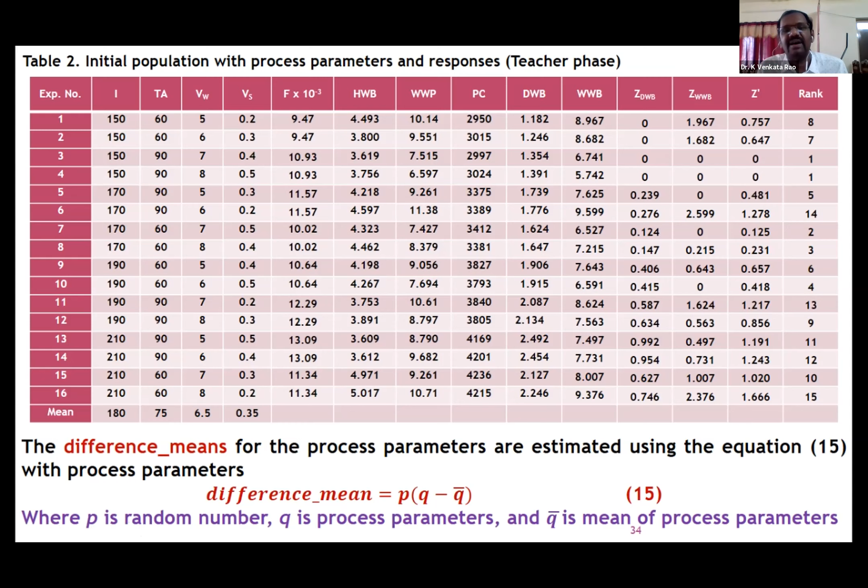As per the TLBO technique, we have to find the average values for the 4 input values. 180 is the average for this one, 75 for the torch angle, this is wire feed speed at 6.5, and 0.35 is the average value. So average values are taken.

Using these average values, we calculate difference underscore mean. Don't worry about these terms, all these are just arithmetic - simple calculations using subtraction and addition, that's all, nothing more. Just listen, I will explain.

So here you have to find the difference underscore mean for the current, torch angle, wire feed, and welding speed. How to find this? Here we have equation number 15. So P is the random number - don't worry about the random number, it's between 0 and 1, whatever value you wish, you take that.

Q is the process parameter, Q dash is the mean of the process parameter. See this one, Q is 150 minus the mean value 180. So P is the random number, whatever you take - this P value is to be taken between 0 and 1. So Q is the process parameter, that is 150 minus mean value. The sample calculation is given here, see here.

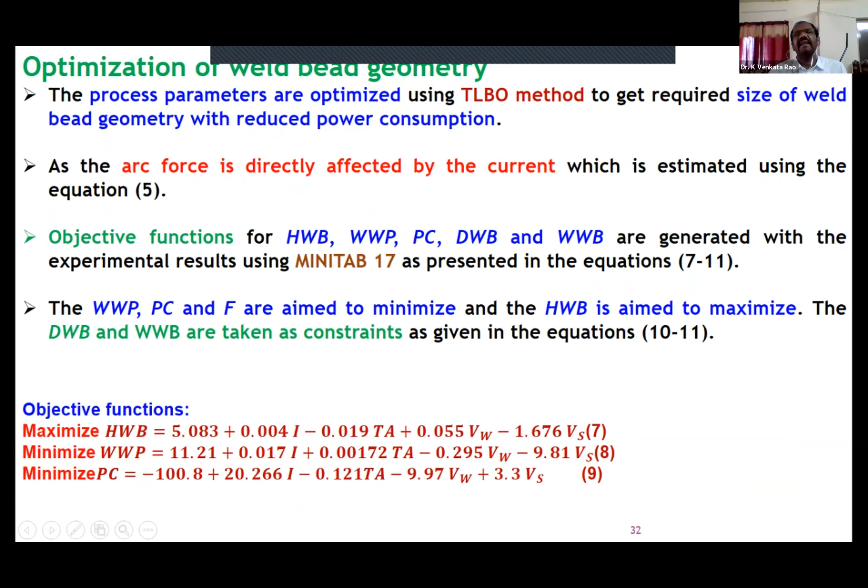After getting the new process parameters, we apply the equations - see this one, 7, 8, 9, 10, 11. In these equations we use Excel to get the height of weld bead, width of weld pool, power consumption, depth of weld pool, and width of weld bead. Similar to this table, constraints are assigned, estimated, and ranks are also assigned.

So still, even with this slow learning, even in the slow learning classes or extra classes, the class performance is not improved up to the mark. Then what does the teacher do? These two - table 3 and table 2 - are combined. That is called the combined phase.

Don't worry, the 16 and these 16 were combined. Among the two sets of 32 experiments, we selected the 16 best experiments from table 2 and table 3. Those are the two stages we have in the teacher phase - the two tables were combined, and the best 16 experiments were shortlisted. Those are presented in table 4. This is the end of the teacher phase, called the combined population, or the output of the teacher phase.

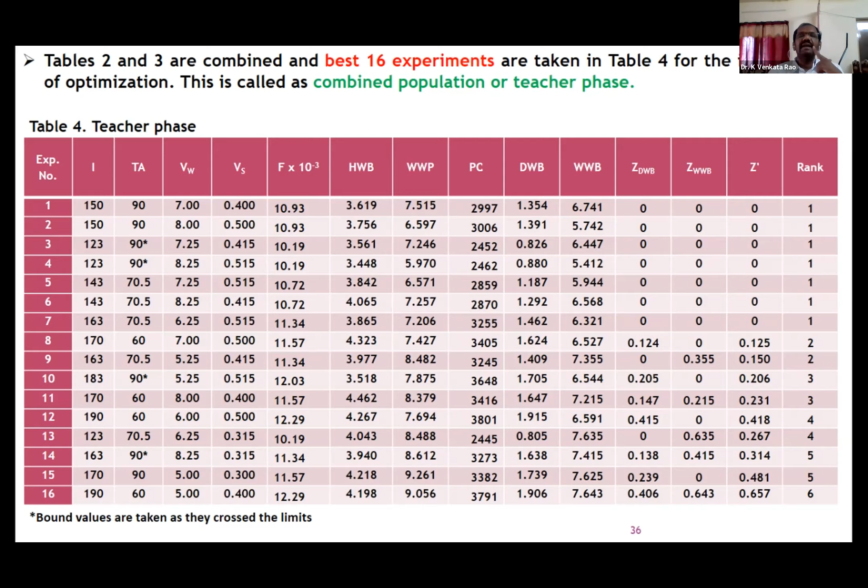He allowed the interaction between 1-16, 2-15, 3-14. Interaction is carried out between best students and the slow learner. So randomly, one student, experiment 1, can be interacted with the remaining 15 or 16. It doesn't matter, even you can take 7. This is interacted with these ones also. So whatever the way, the interaction can be performed randomly, whatever way you like.

One systematic way I followed in the study: interaction between 1-16, 2-15, 3-14, 4-13, like that interaction is performed. So that's how the interaction is performed, see this one. Here also this is new current, new torch angle, new wire feed speed, this is welding speed, A1, A2, A3, A4.

Again we took the random numbers. You can take whatever values you like. And this one is current 1 to current 16. See this one, current 1, 150 minus 150 minus 190. You will get a minus value.

Professor Venkata Rao, sir, sorry to interrupt you. Sir, how much more time does it take? Only 10 minutes. Okay sir, I'm going to finish. Okay, thank you.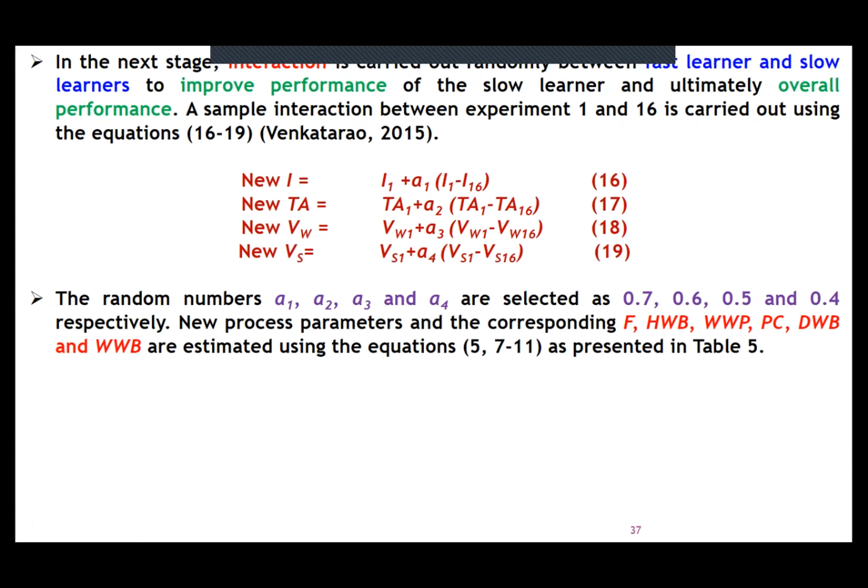Okay, we have a plan for the valedictory function also. Okay, I will close it. Okay, this is somewhat complex, that's why.

Right, see, using the equations 16, 17, 18, 19, new process parameters are obtained for the 16 experiments. So these are the new ones.

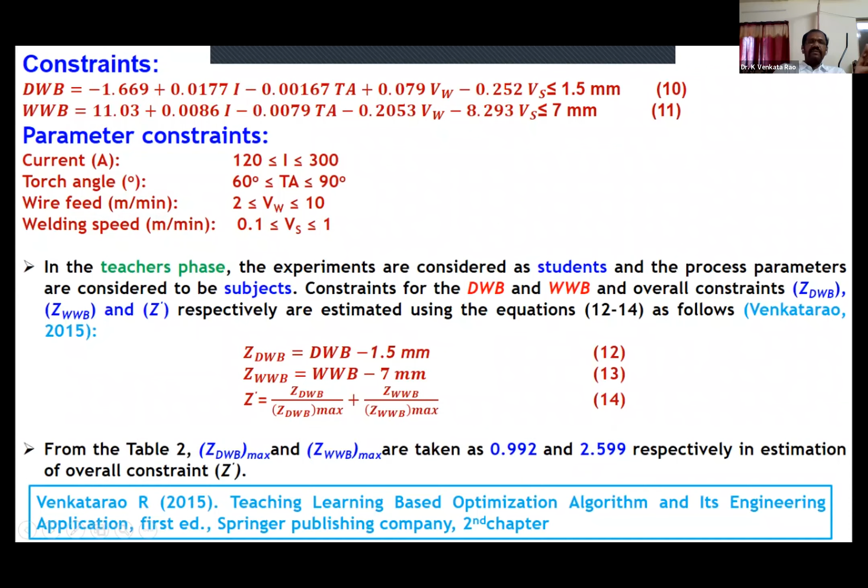Somewhere we are seeing star marks, 90, 90 - like I told you, see here, 120 star mark. The current should always be greater than 120, and for torch angle also we gave bound values, parameter bound values. If the values cross this one, the bound values only are to be taken. That's why star marks represent the bound values - when they cross that limit, the upper or lower value will be taken.

So here we got the new process parameters using the equations I already told you, then new responses were found, and again ranks were assigned.

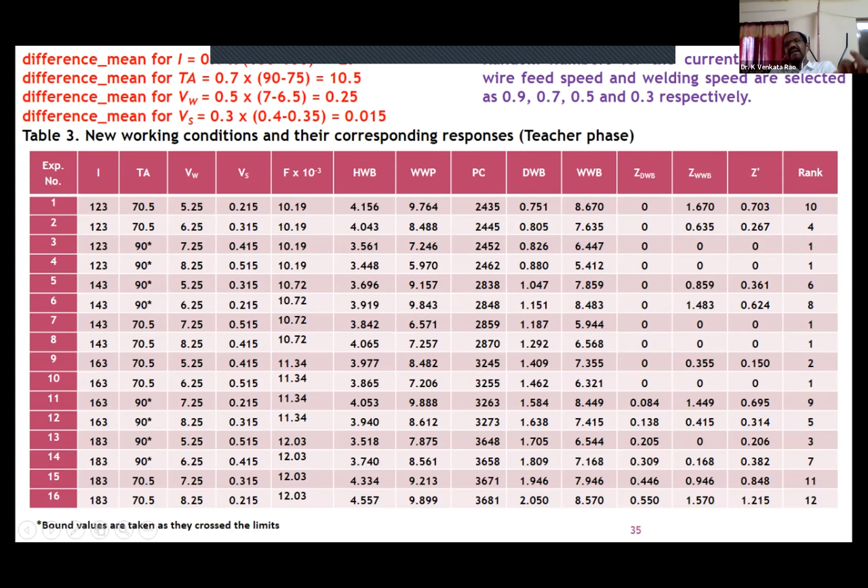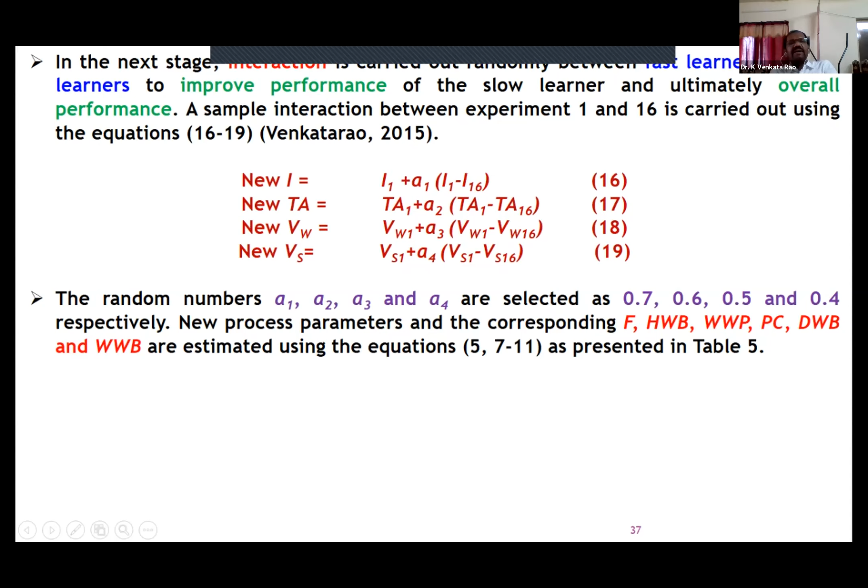So this one is the teacher phase, and this one is the interaction phase. New process parameters were found using that equation, responses were found, these constraints were also applied, and we got the 7 best ranked students in the interaction phase. So before this, Table 4 has the 7 best ranks, and after interaction also you have 7 best ranks. These 7 plus 7 gives 14 best solutions we got.

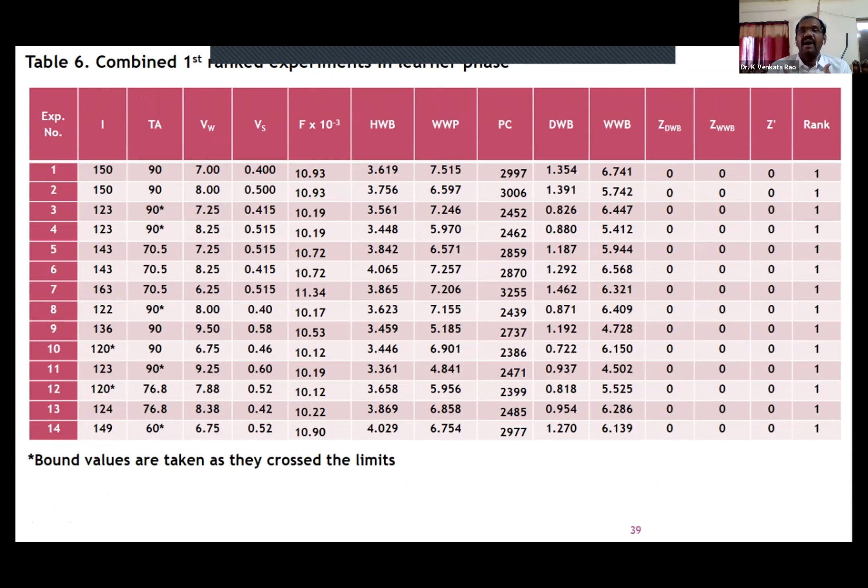So based on the ranks, 14 best solutions were found here. How to find the best among these 14? You can take either one - among these 14 also you can find the best one using this. This crowding distance was found, the equations are here.

These are available in the R. Venkata Rao papers. I also published 3 papers - this is one of my papers, 2019, on power consumption optimization strategy in micro ball-end milling of D2, TLBO coupled with 3D FEM simulation. It was published in Measurement journal. There also these equations are available. So using these equations, 21 and 22, crowding distance was found.

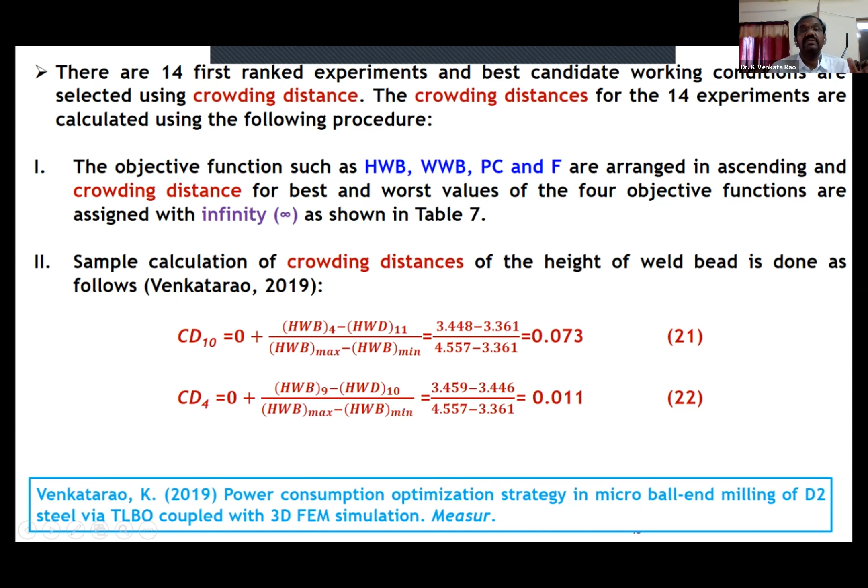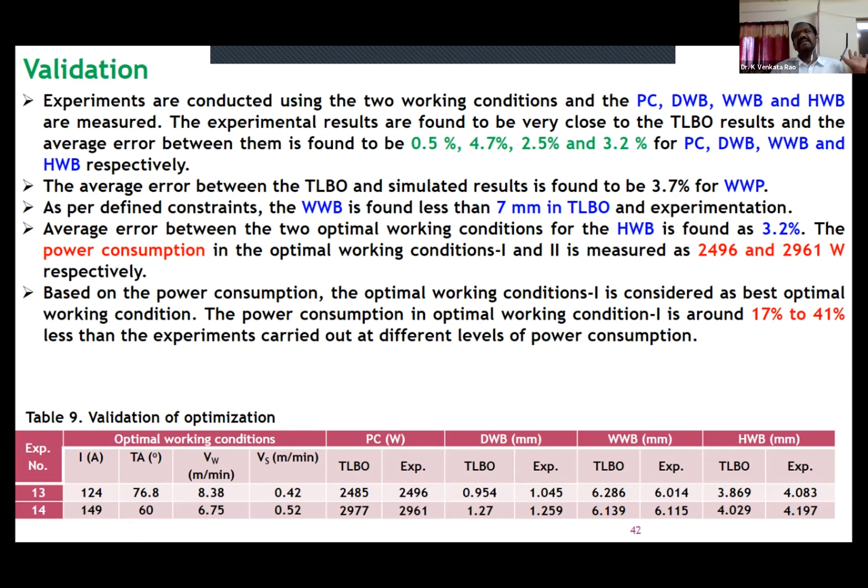Thank you very much. If you have any doubts, you can ask me now.

Sir, Professor Venkatrao garu, is that okay? Can we move on to the question and answer session? Yeah, okay. Now I request Dr. Shobha Madam, please can you go through the question and answer chat box? Can you read out the questions raised by the participants?

Yes sir. Sir, Satish Kumar sir was asking regarding the quality issues that need to be taken care of in additive manufacturing, due to which there may be a possibility of void formation in the final tool.

Shall I repeat the question again? Sir, quality issues to be taken care in AM. In AM quality, you are asking about the quality. Yes, sir.